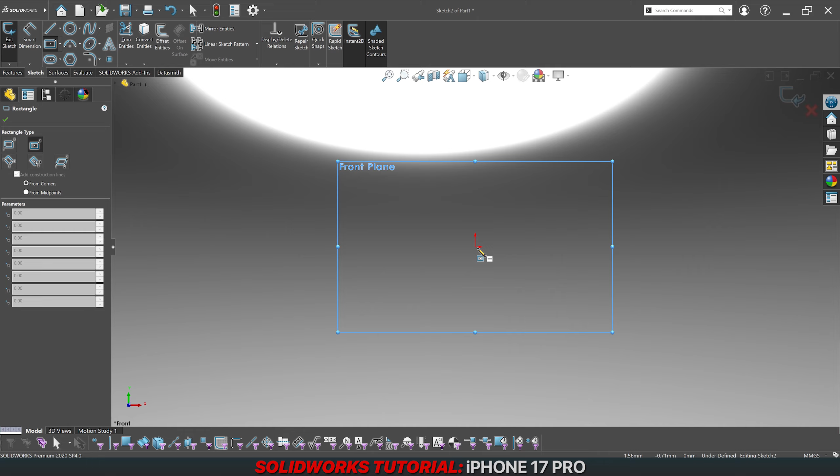So front plane sketch, it's gonna be a rectangle, of course, 150 and 71.9. If you are doing this with me, make sure that your SolidWorks is also set to millimeters. And that's the outline.

Let's save the part just quickly. '17 Pro. Front plane, let's do a front view. I'm gonna unlock aspect ratio, disable this, and make sure that height is 150 and 71.9, like this. Now let's see if this makes any sense.

On X it should be 75, minus 75. No, it's 71.9 by 2 minus, so minus 35.95. I might leave these images somewhere so you can download them for free, of course, if you need them. And minus 75. I'm gonna call it a blueprint.

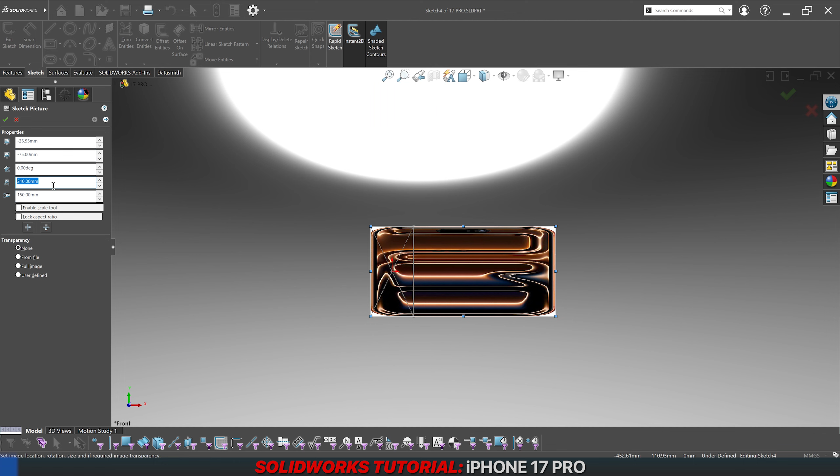So 71.9 by 2 minus, and minus 75, and make sure it's here 150 and here 71.9. It's way better, and like I said, it doesn't have to be perfect, it's more than usable. So right off the start, let's also rename this to front.

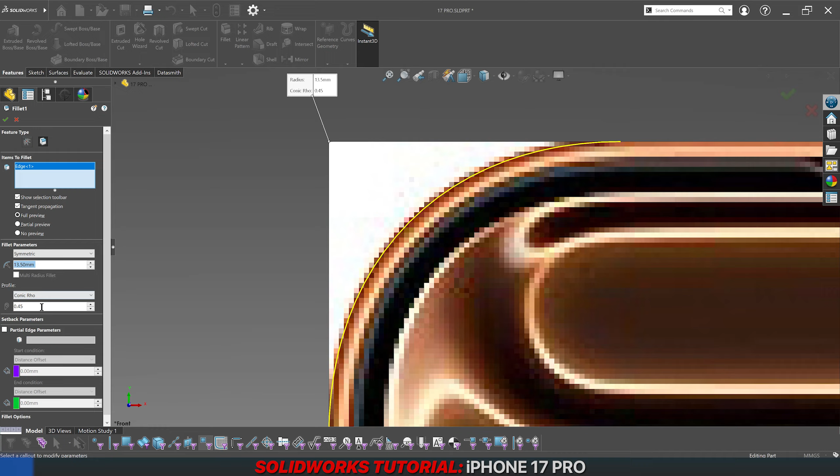13.25, 0.4, 0.45, 0.46, 0.45 actually, or maybe 13.5 and then 0.46. Let's see if this gives us better tangency between these. Yeah, not really. Zebras are again showing us it's not good.

Transition between these surfaces really needs to be good, because like I said, later you can see here how good transitions are looking like. This one is not. So this first portion is taking time, but you know, you gotta do things right.

So what I typically do is something like this: center line from this point here and something like this, and we will make a line between that sits at 45 degrees, because when it's 45 degrees and we give it a dimension here like 13.5, we also have it on this side and we don't have to add it.

As you can see, it's gonna be 13.5, and if we later need to change this dimension, go to 13, this one on the left is going to update as well. Now what are we drawing between these two? It's gonna be, of course, a style spline,

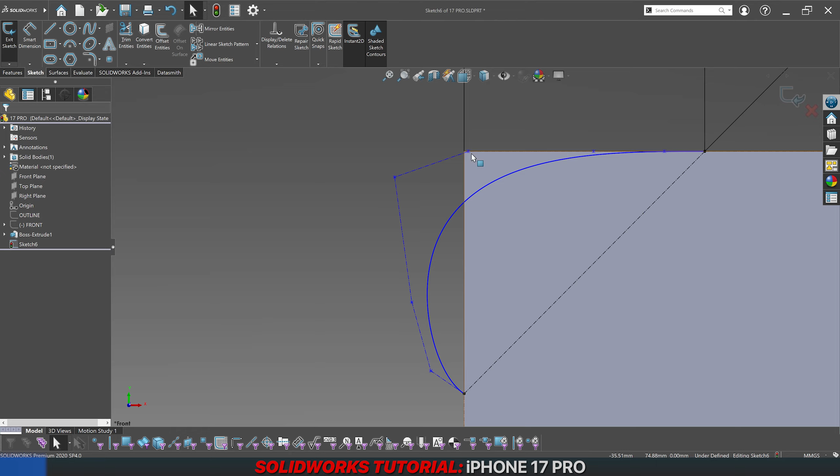And now let's make these horizontal. Horizontal. These should be a lot shorter, so let's drag these points something like this. Vertical, vertical, and vertical. This one, of course, is going to stay angled. It's also gonna be 45 degrees, but we don't have to add this angle. It's of course gonna be this length.

Now, what we are doing from this point on in this particular sketch, two important things. First one is to right click here and enable show curvature combs. And for my screen, I think this is fine. So first idea is that we have to make this transition, which is visible on curvature combs, as smooth as possible.

The second thing is, of course, and that's maybe the first thing actually, is to match this edge to the edge of this front image blueprint. So what I see right now is that perhaps we should make this even longer, 13.5, something like that. We will see about that later.

So this first line till this point, let's add any dimension for a start, like 2.5. Now the second one, let's add 2.75, and third one, let's add 3. Now as you can see, we are pretty close, but to me this transition is not good, and also you can tell by the zebras it's kind of deflecting in both ways.

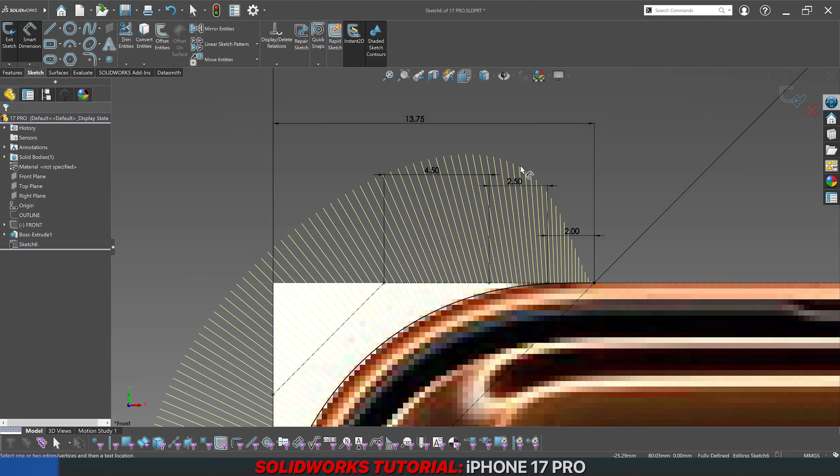Sometimes it's also faster to just delete dimensions and drag these points. Yeah, it feels like this first one needs to be very short. This one in the middle is really not helping me a lot.

Yeah, making the first one longer is definitely not the way. Making it shorter sounds good. Let's see about these now. If we make it how much it needs to be. So something like 1.5 actually. And then the middle, for example 3, and then the last one 4.5. This looks decent.

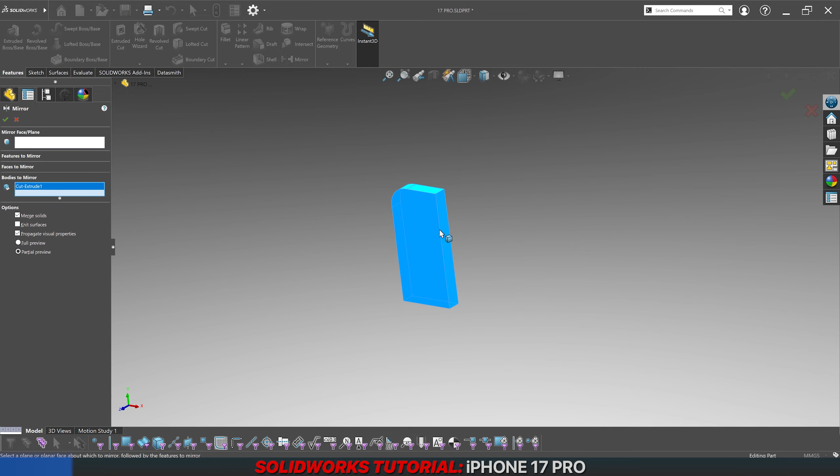The only thing that I have to double check now is when we go and mirror this, make sure to merge solids. When we mirror this around right plane, and I am of course mirroring it as a body, and top plane, make sure merge solids is enabled so it all becomes one body.

Now this needs to be inverted because when the phone flips, so flip vertically, or we should actually, let's actually, I'm sorry about this, let's make a sketch, and first let's make a plane. Front plane, this plane is gonna be at 0 and flip normal. Okay, hide, make a sketch. This way we are looking at it from the back like it is in the

picture. Let's see if I did this one well in terms of cutting. It's not a perfect cut in Photoshop, but I think it's gonna be useful. Yeah, I should have cut a little bit more in this area, and in this one it's good. It's gonna be fine, I guess. Disable this one, disable this one. Again we have 150, 71.9, and same here, 71.9 by 2 minus 75.

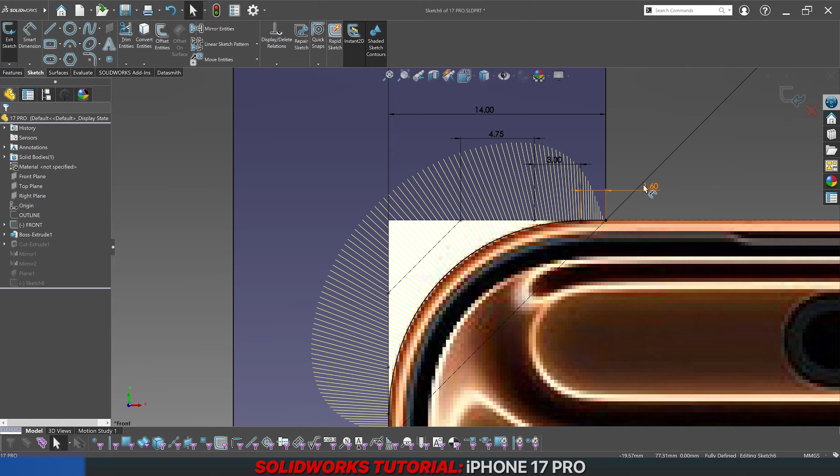Let's actually try and go to our cut. Enable this sketch and make this one 14. Make it 1.6. And let's see if we want to extend this last one. Yeah. 4.75, 3 and 1.6. This is gonna give us a little bit better transition in this area, and it's gonna be more smooth. As you can see, the curvature on this curve to me looks perfect. And now the curvature combs. So 14, 4.75, 3 and 1.6.

That looks perfect. Let's name this back. Let's look at it from the back. Looks way better now, but as you can see, it's already hitting the antenna lines, which is kind of weird that we have gone so deep. But yeah, it also does actually make sense that the antenna line is beginning right at the end of this curvature. So yeah, let's leave it as it is.

One thing that we can also do right now, just to make sure, we go to this sketch. And let's see if we offset, for example, this one. Offset by something. By 5, 4, 3.75, 3.5, 3.7, yeah, 3.5. It's not gonna be the same, but to me this is still indicating that we did actually do a good job. 3.54, 4.5. Yeah, this one is definitely gonna be a little bit smaller in terms of that fillet size.

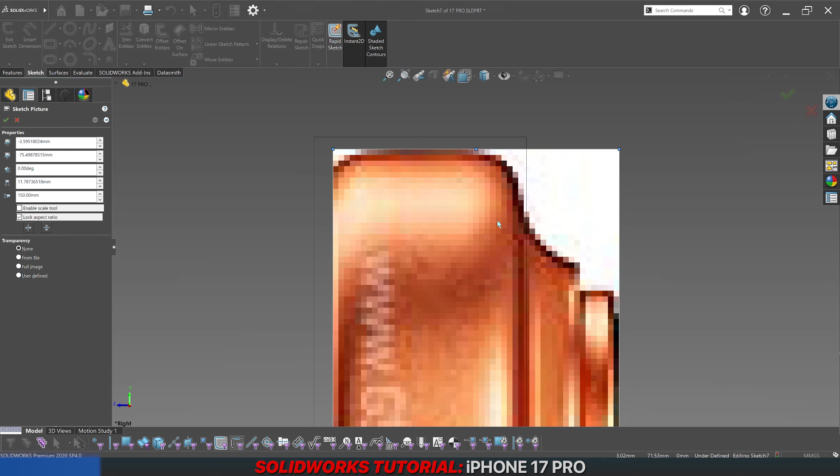150. Yeah. Sorry. Let's try again. Delete. Let's try again. This is how it actually looks in real life when you are not prepared. 150. Let's see if we drag over this, how it's going to look. I feel like it's not going to match perfectly, and as you can see, it doesn't. Especially down here. Let's try making this bigger.

As you can see, as I drag it down, this bottom edge is following our edge, but the left and right are not really matching up. So let's see if I disable lock aspect ratio and we do something like this and something like this. Maybe just slightly higher like that. And let's see the bottom. Yes, slightly even higher. Something like this. It says 150 points. Let's make a round number 35 and 13 points. I don't know, maybe 0.2.

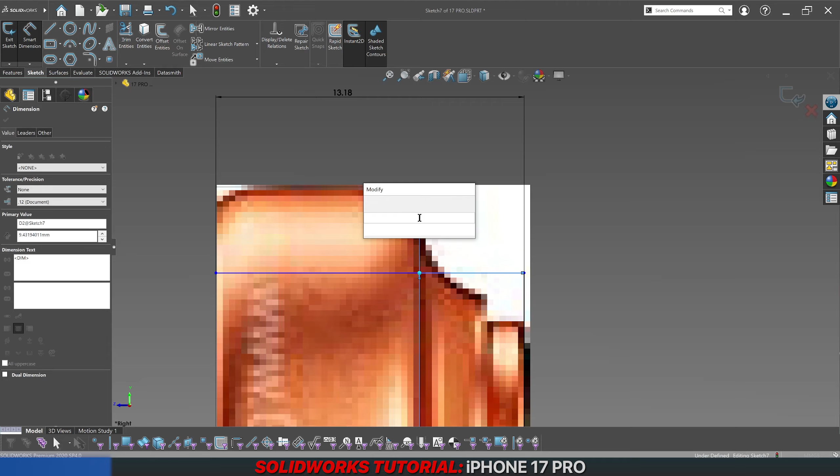Let's see now if we go about 4.4. That's actually quite a lot. I feel like I should have gone the opposite way. Why does this lock aspect ratio keep turning on? Why? What the fuck is wrong here? Yeah.

So the camera bump is somewhere around here. From this edge it should be 416, I guess. I guess that's it. 416, 418, 1318. I think this is an accurate representation. I still feel like this should go more towards the right. Yeah. Oh man, this fucking lock aspect ratio is...

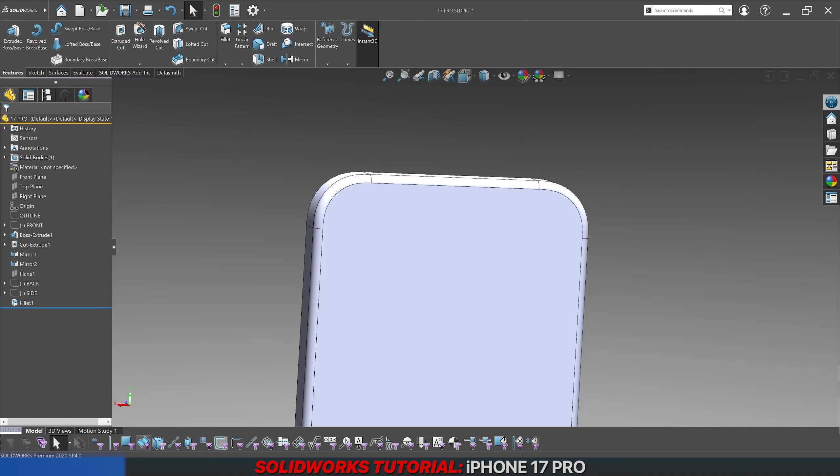The only thing that I'm wondering now is, should these fillets, especially the one on the back, be like a typical circular normal fillet, you know? Because if we look at... shut the fuck up. We look at the image, it doesn't seem to be any special kind of fillet. But if we look here on the side,

yeah, let's have both of these at 2. So the front edge should perhaps be smaller or not. 1.75 or 2.

I gotta open up my iPhone that I have in my case. Just a second. I don't have the same generation iPhone, but I'm wondering if the front fillet is smaller than the one on the back. Yeah, even if it is, I can't really see it with my eyes.

But I was also wondering if this fillet on the back should, for example, be curvature continuous, and once we turn this on, yeah, it looks too much. Let's bring it back to a normal circular fillet. Oh, it's this one. Circular, and I'm still doubting the size. Should it be 1.5 maybe? Like smaller or bigger?

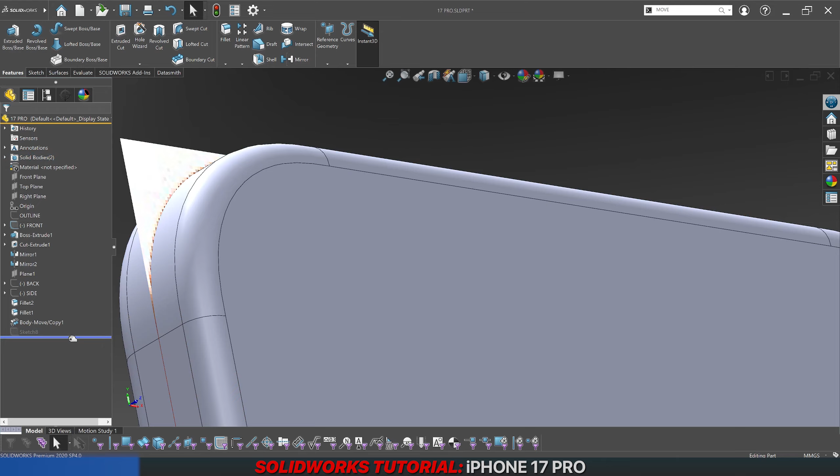Now we will need this body, so let's go back on that one, move copy command for the bodies, click on the body, copy one, click OK. Now as you can see we have 2 solid bodies, and I'm gonna hide this second piece. I'm gonna take our sketch and cut by, for example, 2.5 or even 2. I think it's enough, or let's go 3. Something like this to the inside.

Let's hide this body now. Let's unhide this one. Use the same sketch, extruded cut, 3 millimeters, flip side to cut, and select this one. Okay, now we will take this face plane, make a plane by 0, and use that plane to make a cut with surface.

In order for this cut with surface to work, you need to have here, when you go to features, this small tab, right click, you need to have the tab called surfaces. So once you go to surfaces, you have cut with surface. That's it for that. So this is gonna be the front and this is gonna be the back. Let's see what else I have to do here.

Yeah, we need that black bezel and a glass on top of it. So this is gonna be... I'm thinking how to do it with less drawing over. Let's for example make a fillet 1. That's too much. 0.25, 0.5. Yeah, let's do 0.5. It's gonna go of course all the way around. Now

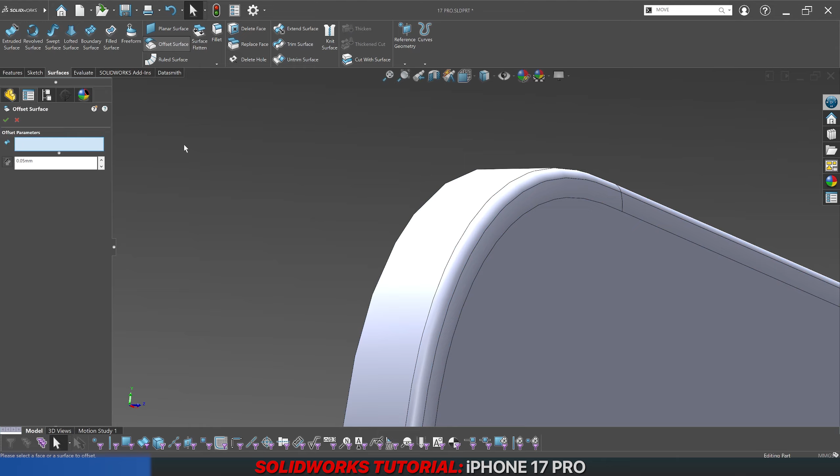and aside from this one, let's make another surface offset. We will offset again everything. This time around we don't have all of these selected. Do not select the back face. 0.1 again to the inside, click OK, and we go cut with surface. We use this second surface offset that we just made. We go to the outside and we click on the body.

Let's hide surface offset 1. It's already hidden. Okay, this body needs to be black. Because this is gonna be... no, not the surface offset. I want this body, appearance, body. I want the body to be black. What is wrong here right now? What am I missing?

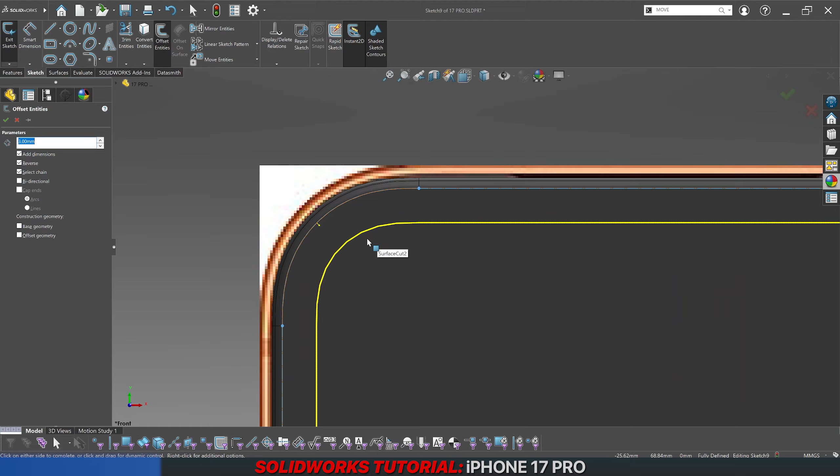Anyways, front plane sketch. We take front, show, and let's click again on this inside face, convert, select, for construction, offset by 3 to the inside, and let's make it actually 0.5. This is gonna be the screen, and as you can see it pretty much fits well all around. Exit, and let's cut it right away. Extrude cut through all, this direction.

So we have two bodies right now, the bezel and this main body. We also have surface offset 1, surface offset 2. Okay, surface offset 1 is going to be called screen glass, yeah.

That's okay, and let's just make sure, if we click on right plane and make a section, that this surface that is going to represent the glass in the 3D rendering is simply not coincident, if I can say like that, with this surface. This is quite important because if you match this glass surface with this surface and you have, for example, some dark plastic material here and glass here, and they are sharing the same exact surface, you're gonna have glitches

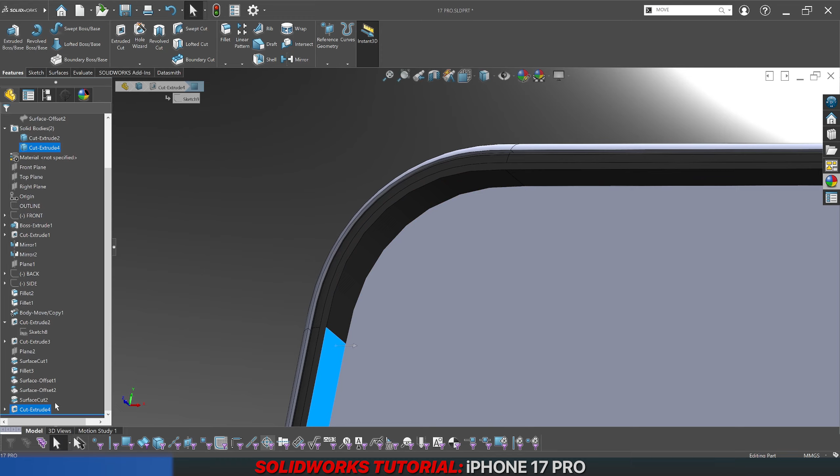How to make the screen fast? We have this sketch, so let's make, for example, extrude, and it's gonna be on this face. Let's make it 3 as well, and go to this direction, to the inside. Do not merge result. We obviously want this to be a separate body, because also in this separate body we have to make some cuts for the camera. Show this one.

Let's see if we can do it something like this. Pill shape design. This can be, for example, 3. This length should be 15 maybe. Yeah, it's kind of matching. And from the origin it can be 67.25, or yeah, 67.5. Exit, and we can make the cut.

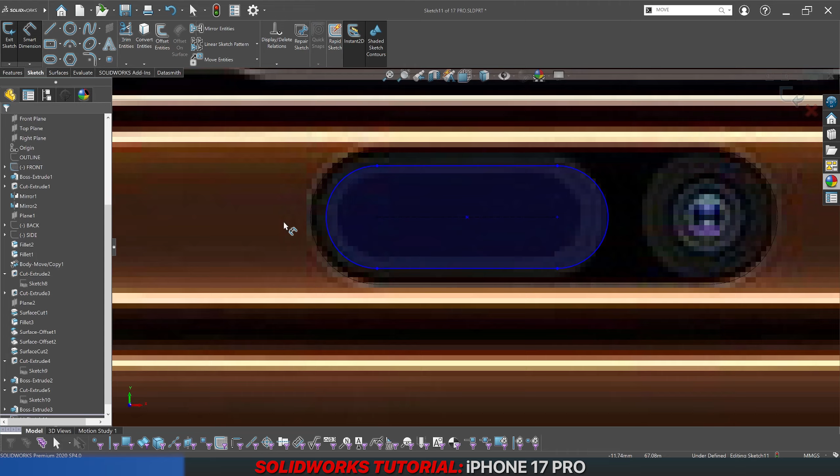I'm gonna copy and paste appearance, sketch once again. Let's make just a straight slot, like simplified sensors, something like this, a slot, and let's see the size for it. 2, 7, 725. Yeah, not 0.5, 725.

It feels like these sensors are also having some sort of, as you can see, outline. Let me look at my iPhone. Yeah, you don't really see that. We will only do something like this. We will cut by 1. And we will actually increase the size to 2.5 to 25, sorry. And use the same sketch and just make a planar surface.

That's it. This surface, we go to surface plane and we make it really dark so it's distinguished from this one. And these are the sensors. For now I'm just gonna do a hole for the camera. Of course I can't see anything well, and now I can.

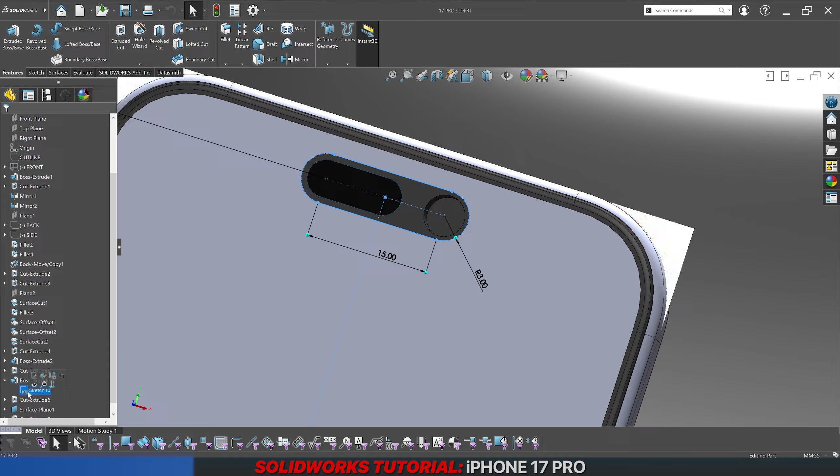So let's continue. We have to do a camera here. I just wanna check out this slot dimensions. Let's see. This is 3. Yeah, that looks believable. And also this one is 2.25, 2.5. Yeah, that looks better. Here we also have 15. Okay.

Blueprint. I also wanted to check something. I'm not sure if we did that earlier. Yeah, the curve is fine. Okay. Looking at the blueprint, we can see the camera housing has like a ring around. So let's actually use this sketch, sorry. Let's use this sketch because it's already there. Extruded boss, thin feature 1 millimeter.

Let's go up to surface. Oh no, actually let's make it 3. If it's 3, then we might need longer. Or not, let's see. Inside, yeah, that's too much. 0.5, 0.75, 0.7. Do not merge results. Let's see how deep is this cut. It's 2.5. Let's make it 3 as well. But then this slot is also 3. This has to be shorter. 2 point, I don't know, 75.

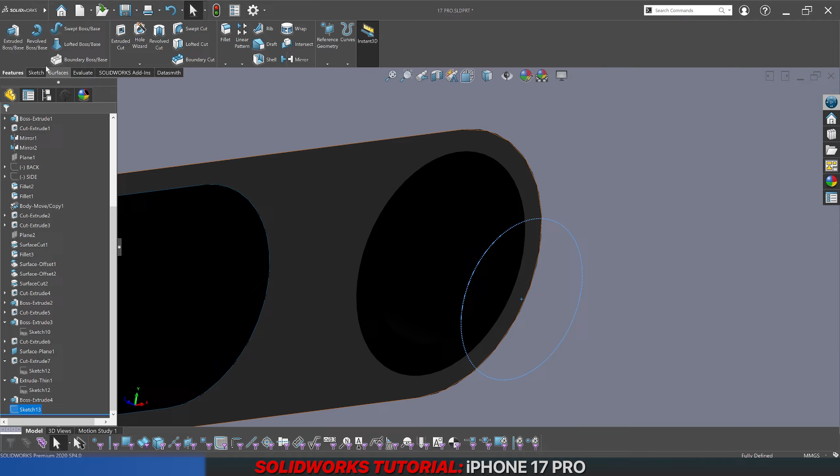Now inside here we go to this face and make a sketch, convert entities, and we will go 1.5 maybe. No, we need the housing, sorry. How much should this be? Let's go up to surface. Yeah, it actually needs to be like 2.5, I think. Yes, 2.5. It's gonna be thin feature 0.25 to the inside. Do not merge results. I also have to double check with this blueprint.

If this one is like that, then this one is something like this. Yeah, let's make this one. Let's leave it as it is. Sorry. This one actually needs to be bigger, 0.5. Yeah, that looks also believable. This one is later gonna be dark as well. For now, let's also make something similar there. Sorry about that. 1.75, or maybe less, like 1 mil. Let me see. This is the beauty of not being prepared. Merge result selected, feature scope this body.

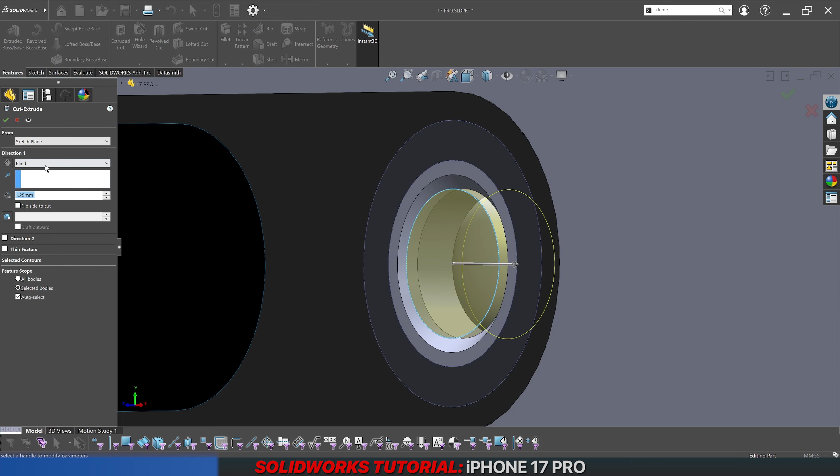That's that. And also this face, click on it, go to surfaces, offset surface 0. Confirm, make sure that surface offset is there, and then let's use which sketch this is. We need this sketch, or no? Not really. We need another sketch right here. Let's use this face, and let's go over here and click on the edge. Convert, it needs to be a circle, and then extrude cut through all, and click on this body.

This way what we have done is, if we hide surface offset, we have deleted the surface body that we have used, and as you were able to see, it was elliptical. I don't want it there. I will also have to add here on this edge a planar surface, click OK. And I'm gonna have to move it slightly to the inside so it doesn't intersect. As you can see, it's intersecting this body, this black one. So go to move, copy bodies, click on surface. To have this tab you need to press F5 on your keyboard. So filter surface bodies, click here, do not copy, and we move it like this by 0.25 for example.

This surface body is going to be like the farthest back of the camera lens. So let's go here actually, surface bodies. Let's call it lens, or lens back. And then we unhide the surface offset, show. This is gonna be lens number 1. So we go here, rename lens 1, and we will again go to move, copy bodies command. This time around again have this filter on, click on this one. And do we want copy? Yes, we want copy. Let's go like this, 0.2, click OK. And this one is gonna be lens 2.

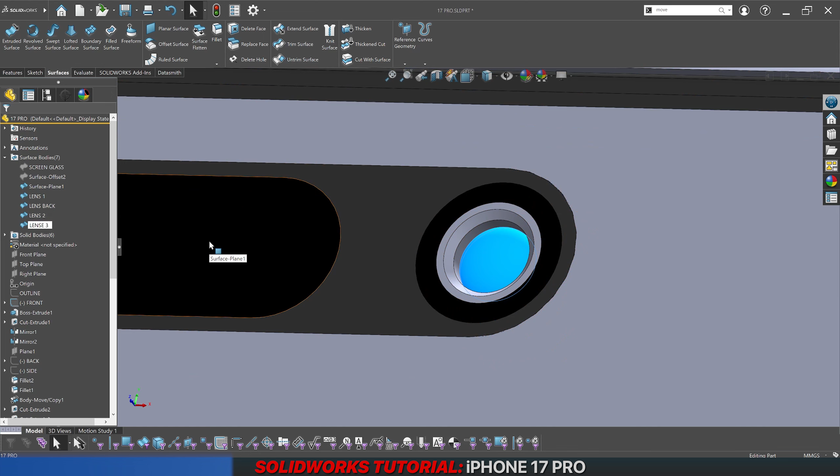Is it spelled lens with an E or lens without an E? That's the biggest question for this video, I guess.

That's the camera done. So we have this first housing, we have this imitation of the sensors, the face recognition sensors. We have the camera. This housing is also going to copy this appearance to this one. In the rendering, these two are not going to be the same, because this needs to be rough plastic or something like that, rough metal.

For the lens, I'm going to hide this one and this one and go to this first one. As you can see, lens number 1 is only visible, so we go to this body. I'm just going to make it blue because later in rendering I want to have it separated from the rest of the body, from the rest of the parts in the model.

Copy appearance and lens number 2, I'm going to paste it here, paste to the body, and lens 3, paste to this body. That's pretty much it with the camera. Let's also unhide screen glass, show. Yeah, that's pretty much the front of the iPhone finished, I guess.

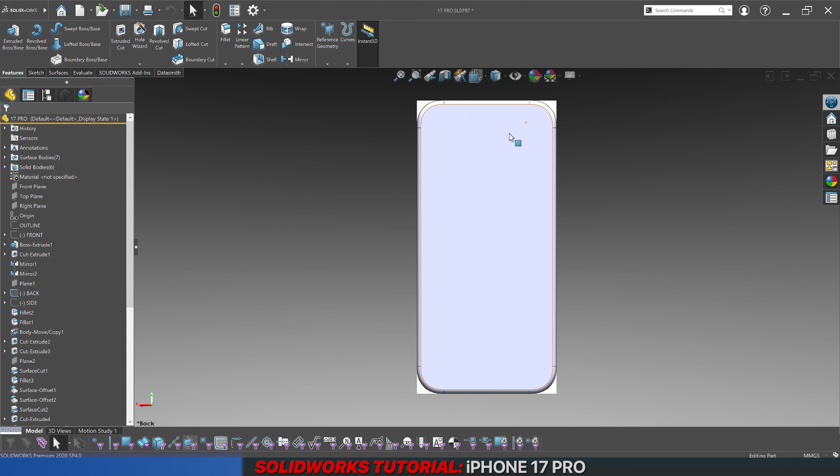We can start the rear, and where is this sketch? It's called back. I'm going to make it visible. Let's create, of course, this slot for the camera. Approximately. We'll see about the height. Height should be somewhere around 35. Let's make a center point vertical with origin.

And the width is, let's see, 63.35. Let's also see if we were going to offset it from here to 66 and from here to 45. Let's see if we can make these two edges equal. Make equal for construction.

This means that vertically from origin till the center point we have something like 53.05. Yeah, I think that's that. Keep in mind that this at first is going to be just a normal solid body separated from the other body. It's going to be like 5, direction 2, 3, do not merge results.

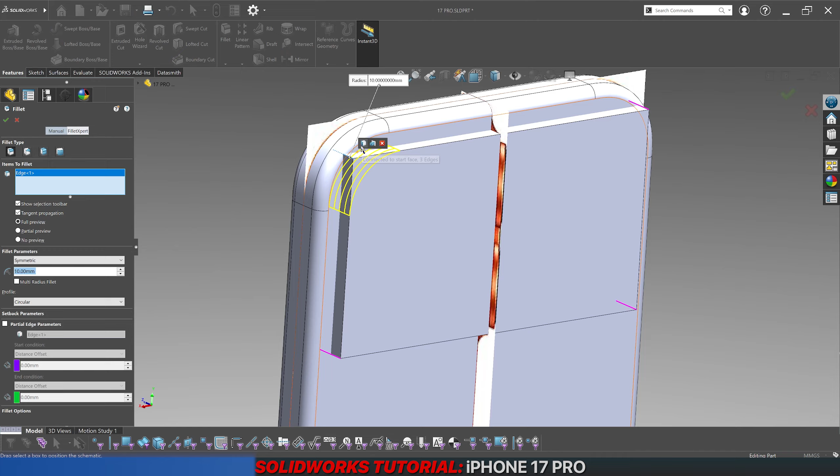Now visually from the back again, let's see if we can make a simple fillet here. Let's see which dimension it's going to be. I think it has to be curvature or something. Yeah, curvature is too much. Conic rho. Conic rho seems decent, I don't know. 10 or 9. 9.5. 10. 10, 0, 4.

Let's also see if we can do conic radius 11, 9, 8, 8. So it's conic radius 10 to 8. Let's see about the transition right now. It's not great, but this part of the iPhone is rough metal in the end, so it's not really going to be visible a lot.

So let's go next. Now, how I usually do this area, let's first also do a combine feature, these two. I usually do either a chamfer that is like 2.7, and for example 30 degrees in this direction, and then I do a fillet, 2.7, 3, 4, 5, 6, 7.

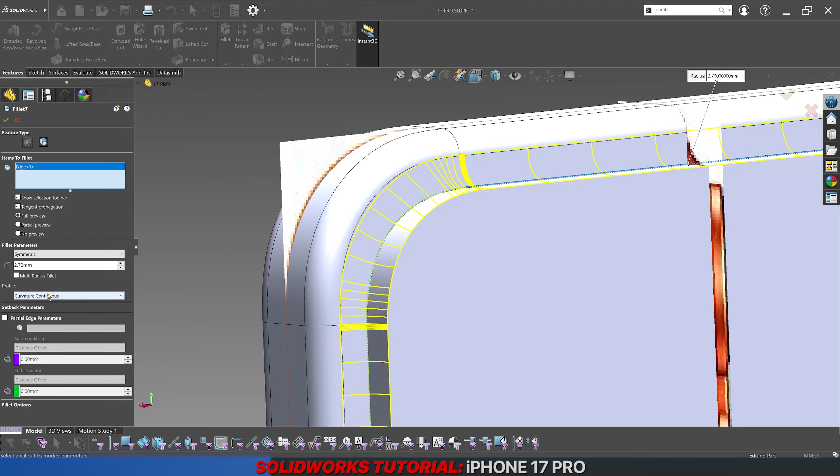I feel like there is absolutely no difference. The curvature continuous is actually kind of heavier. Let's just go with a simple fillet, and that should be completely fine.

The only thing that I'm wondering right now is if this should be so big in size. 2.5 to 2.5. If we make like a smallest of fillets, 0.25 here, let's see. Yeah, if it's looking too much, like maybe 0.1 only. Reason I'm doing this is because I'm trying to make this fillet as small as possible.

Let's try deleting this one, let's try deleting that one, and let's try doing an asymmetric one. 2.5, 2.7. Which one is the bigger? So 2.7 here and 2.5, 2.5, 2.4. Let's try doing 2.35 and 2.7. And then I pressed X. So 2.35 and 2.7.

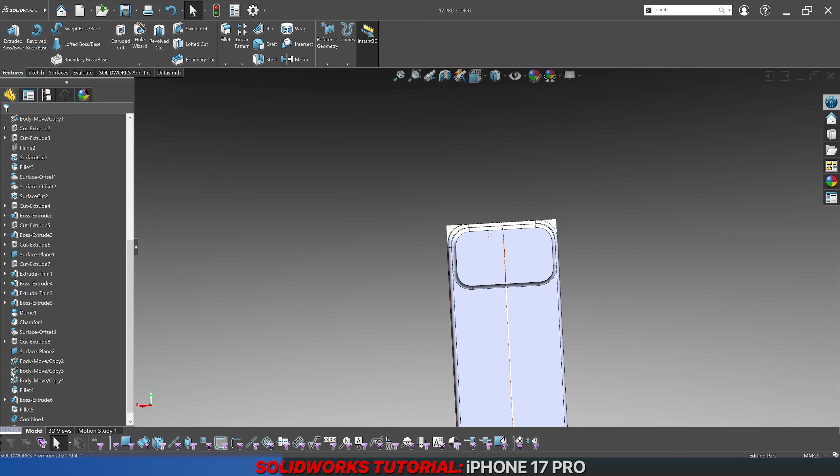This is the deal, is that I want to avoid these fillets overlapping each other. Perhaps the other way to avoid them overlapping is that maybe this fillet in the end could have been smaller, but I don't know. It all looks so close and so similar. When it comes to shape, I don't think it's too big of a deal. Let's see what else. This other fillet that we have, that was 0.1 around this edge, we will add it later once the whole thing is finished.

Let's also check curvature. Yeah, this was one of the reasons why I didn't have to do curvature or take care of these. If you remember before fillet, you see the curvature between these two is not so well as zebras, but as you can see they kind of disappear and become one because we have to add fillet. So it doesn't make a lot of sense to be struggling to make a perfect transition, because as you can see you already have almost a perfect one.

Let's go here, and for this end I'm just gonna add these circles, or actually let's dive deep and do this part. Now what's important here, I guess, is that a distance here has to be similar. It's 1.5 and 1.5. And vertically, let's make sure these two are vertical. Let's go down. And let's go from origin actually. 30. If we go here between these two, 3.2.

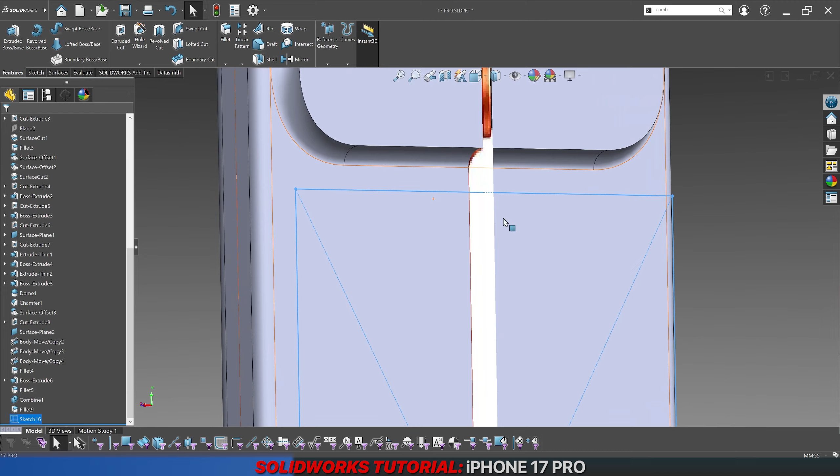Close the sketch, and it's gonna be a pretty similar process. Actually, let's right click, edit sketch plane. We have to do this face. We will create extrude boss. Let's do, I don't know, 20. Do not merge results. Fillet. Let's see if we can use the same fillet that we used. How much was it actually? It was conic radius 10 by 8. So it's symmetric.

Conic 10 by 8. Let's see if this is the one. Yeah, it's quite the same fillet. It's not looking perfect here, but nobody's gonna notice that. Now instead of going this way, it should be going the opposite way. So 1 to this side, or even smaller. I don't know how thick the glass on this iPhone can be in this area.

Let's sketch and not offset, sorry. Click on the face, convert, exit, and let's unhide. What was that body? Fillet, this one. We'll take this sketch, make extrude cut by 1.05.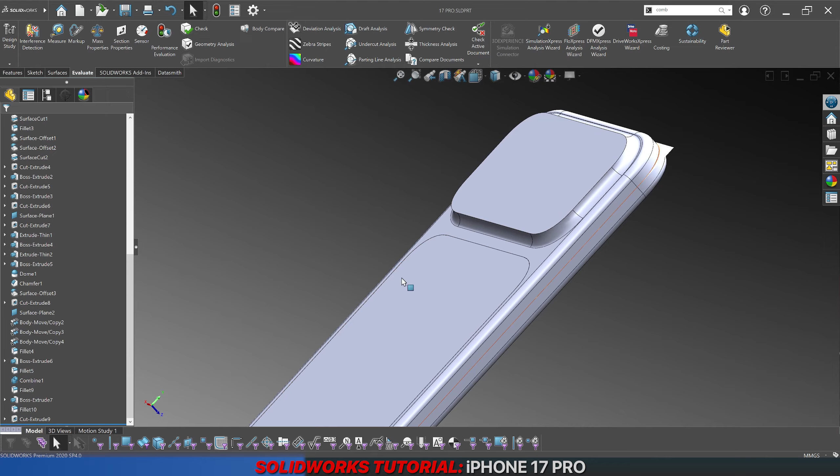So this is also what we need to avoid here, because as you can see, faces are actually intersecting right there. To avoid this intersection, we will add, using this sketch, another cut. It's going to be thin feature, this time 0.05. Mid plane, it can go again 1.05, and actually let's select the glass body. Click OK, and let's use section again on the right plane to see if we have this distance between. Yes, we do. This time it's smaller because we used the mid-plane option, so it's 0.025 in between, but that's quite enough in terms of rendering.

Uncheck this. I'm gonna quickly open up KeyShot just to show you what I mean by these intersections and issues and glitches. So KeyShot, we put our model in, GPU, just a second. Material, unlink material, unlink material. This can be glass and metal. Let's see, for example, any kind of metal, polished. Now this looks kind of deep, so we'll have to see how deep this is gonna have to go. Let's see about the rough one.

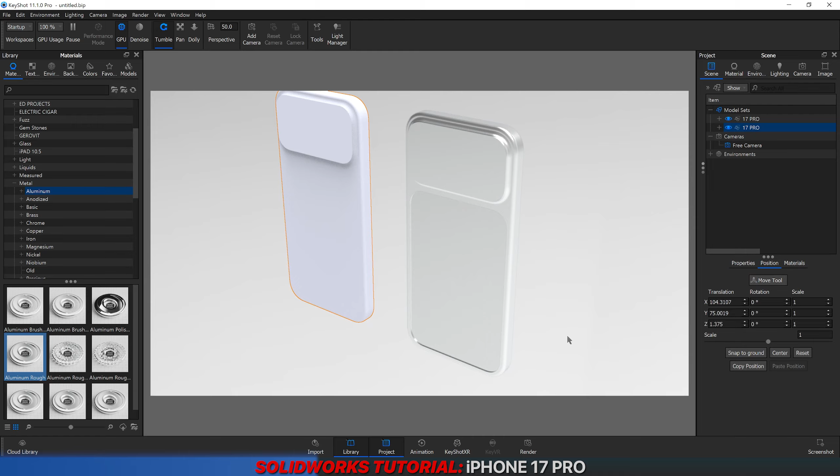So this is the new one. We're gonna move it like this. We're gonna shift left click, control shift right click, shift left click, control shift right click. Now if we zoom in here, you can see the glitches. You can see the glitches.

Let me show you, yeah, refractive. If you even uncheck the refractive, you're gonna see glitches everywhere, as you can see, a lot of glitches. It's simply because you are sharing the same plane for two surfaces, and it's not something that you can do in 3D rendering. When it comes to this part, whatever you do to this material, you are never going to see glitches. You can see, for example, dark area, but you are never gonna see any kind of dashed lines or anything.

Let's continue the work, and as we have gone from the front to the back, let's do antenna lines, and for a start I think you can use the front plane sketch. I'm gonna go back and see if I can see well. Yeah, we can see very well the antenna lines. Now, it's kinda complicated because this edge is not following exactly this one, and I really think right now that it should actually follow it. So let's see how to fix this.

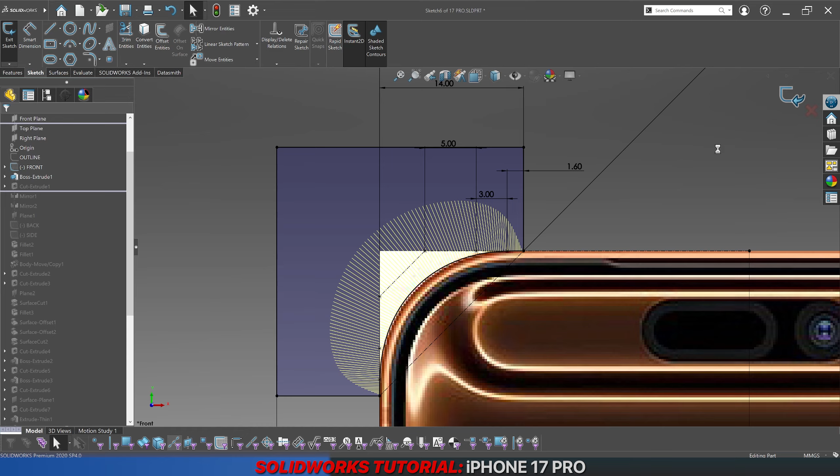This is now the moment where you can see how SolidWorks is super powerful software, and if you set the model correctly, you can just drag this blue thing down and you are good to go. There are zero issues. So maybe I haven't prepared a tutorial for you, but I have planned very well all of these steps without too much complication, so that we can easily change and adjust things.

Let's see if we can match these two edges to sit and be coincident on each other.

I'm sorry, I'm also gonna have to drink coffee as I record this video.

We have this boss. Let's see from this extrude how much we have between these two. There is going to be 955. Is it a round number? Yes, luckily it is, and I guess it's quite the same here. Yeah, 955. So this fillet should be, I guess, 955, and as you can see it's 10 by 8, so we should be able to have it done well.

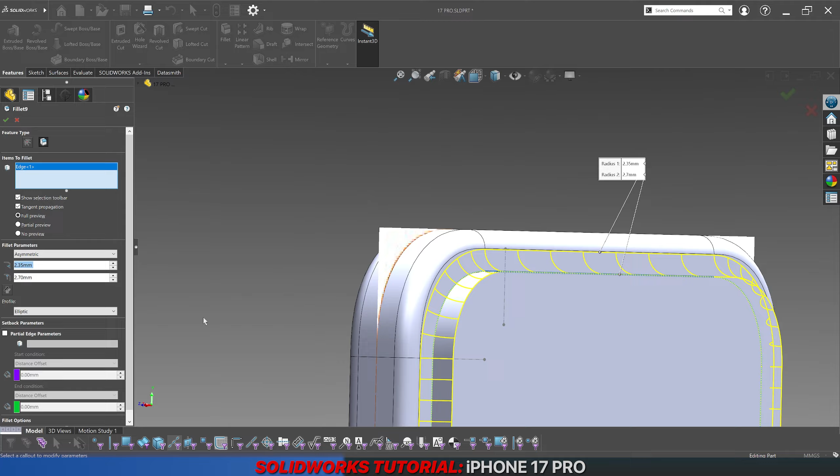So we had an asymmetric 2.35 to 2.7 fillet. Sorry for my accent. 2.8, no, 2.7. It's this one here, 2.4, 245.

2.5. Yeah, it's kind of deleting the edge. 2.45. Let's see if we do 2.45 and leave this one at 2.7. It looks good. I believe that in a way it makes more sense to have it done like this, where there is no small face in between. It's not like a huge mistake if you do it otherwise.

Also, judging by the image here, you can't really tell. Like I said, I don't know if these two should connect or there should be a face in between. To me, this looks good. Let's go further. And let's hide this sketch. It was just a sketch that helped us with those dimensions.

And let's do antennas, front plane sketch. Couple of minutes into the video and we are just where we started off. Let's take this face. I'm gonna convert, select, make it for construction, offset by 0.25, and then make another offset by, let's see how much. Make sure it's select chain. It's not working for some reason. Yeah, there always has to be something with these things in SolidWorks.

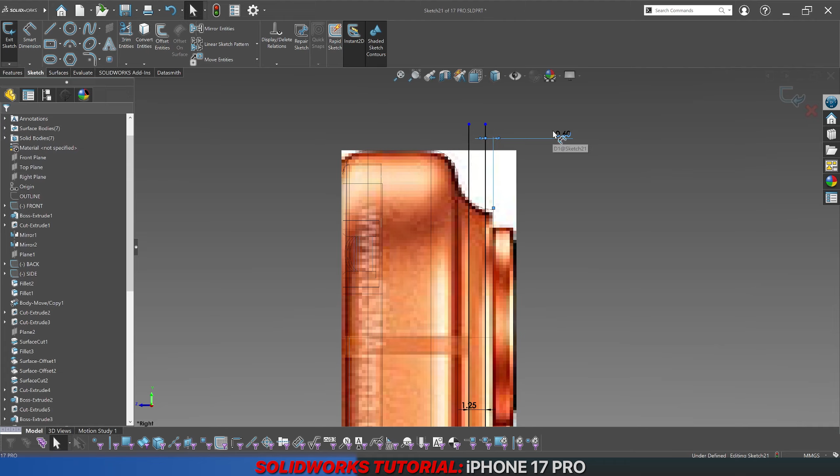Let's also make a center line from the midpoint of this line like that. Make sure that it goes from origin to the center line, 55. We can have here anything, like 55 as well, for example.

Like I said, I'm sorry, but I had to finish off my coffee.

Exit the sketch. Before we go to split line, let's also make sure that we do move copy bodies, we want to make a copy of this just so we have a good decent copy. Click OK, yes, and I'm gonna hide this copy and use the sketch. Go to curve, split line, split only these lines from the fillet, and that's it. This already looks kind of good.

Let's add the main body lines. I believe these should kind of intersect here, so let's go like this. And if it was 0.125, then it should also be here 0.125. Reverse, yes, okay. That's at least the same. Let's add any dimension like 15. Make sure that you have gone from this point. And the same thing here. This time around it might be even easier, as we go from this point, something like that.

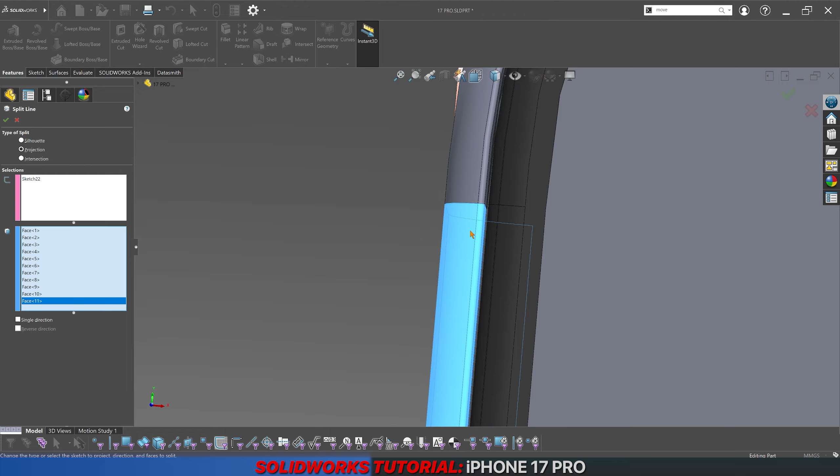The only thing that I am going to double check, maybe I can do it right now. Yeah, we don't really see how this antenna is finishing inside. This is something I'm gonna have to check before I continue the work. We can do it some other time. So I will double check on that, and let's see here. Yeah, it's all the same faces. No, I actually forgot to add this face and the same thing here.

Now these are connected, and we can go and do offset surface by 0, of course, because we only need a copy of these faces. So around the camera bump and into this one. That's all good. Confirm by clicking enter. And the same thing here, offset by 0.

Now let's remember, this fillet was 0.1, I think. We don't really see that right now. Let's see now how much it was. It was 0.1, meaning that our thicken cut can't be bigger than 0.1. Surface offset here, surface offset there, and third should be here.

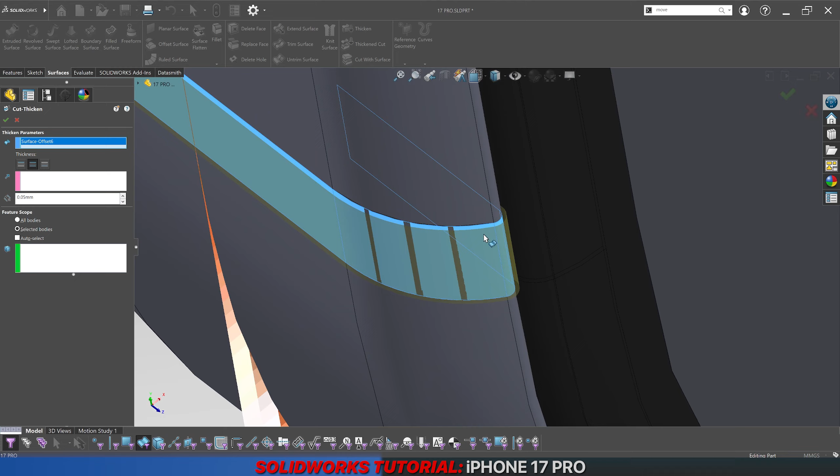Now, first things first, thicken cut. So we said that it cannot be bigger than 0.1, so 0.05. Maybe it should be enough. Here, no, sorry, delete thicken parameters. Let's make sure that you have this. Press F5 and filter surface bodies. You filter this one, and you go with this. Thicken both sides. Cut this body out. That's all good. Same thing on this side.

Thicken cut. 0.05 middle option. Select body, select this one, and same thing here. That all looks good, and just for a second I'm gonna hide all of these sketches. Also, if you remember correctly, we had another solid body as a copy of this one. So let's hide this last body and show the previous one that was a copy.

Before we go further, I'm gonna drink my coffee.

We also have to go back right now because I forgot one thing. So you just go here where you see this blue line. You drag it up till the first surface offset. You click on first surface offset. You go to offset surface and it's gonna make it on 0. It's gonna make a copy of that one. Click OK. Same thing with this surface offset for the bottom antenna line, and same thing for the third antenna line.

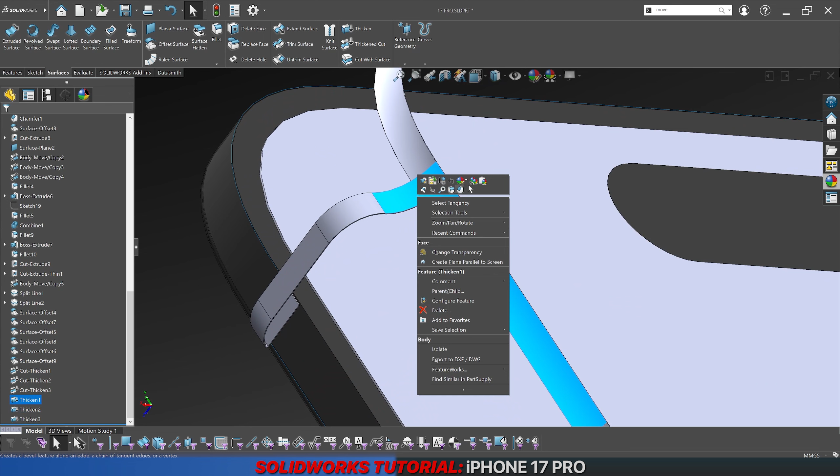As you can see, I have made some appearance by going to edit appearance, and I clicked on the body, and I'm gonna copy appearance and paste it to the body as well, just so we can have a better look at what we have done so far. And let's also unhide the thicken cut. So that's how this body is looking.

The only thing that is coming to my mind is, as this body is a glass body, should this antenna line go even further, like on this face as well? But like I said, I will double check on this with some images online, and I will let you know. For this portion of the video we did these antenna lines very good. Let's double check here. The dimension is probably the same for both, but to me these visually look different from what we've done. I'm not sure if this is something related to 3D rendering.

If we turn on the perspective, let's roll the view. It might be only the effect of 3D rendering. We will also have to deal with this some other time. This fillet to me is now really a question mark on how exactly it should go. I don't think we did something wrong, but we might need to come back later and double check on that. Let's turn off perspective.

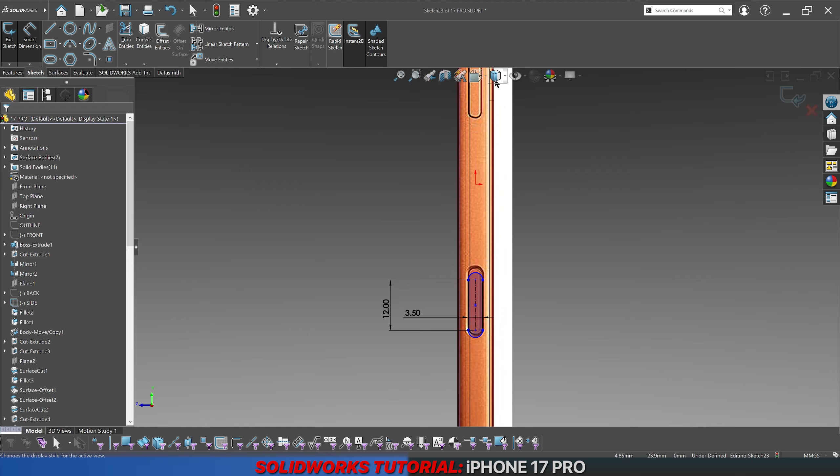Dimension roughly is 3.5 maybe. Yeah. Length 13 or even less, 12. Let's see, it needs to be, I guess, in the middle. For construction we're gonna go something like this. Or actually, let me check. Yeah, it's not a smart idea to attach it there, because the antenna line is not an object that is always there, because of the rebuild and stuff.

Anyways, I'm gonna go from the origin vertically, of course, and from origin it's gonna be 22, 21.5, 21.75, 12 and a half, 12.25. Yeah, that's it. 12.25. Let me just look at my phone. It's having a similar cut. Okay. So let's do like 2 to the inside, extruded cut.

We will of course do a chamfer of, let's see how much, 0.25, 45. I feel like the angle on this should be different. Let's see if we can do 0.5 and then here in the angle like 30. Let's see from this view. Yeah, that looks accurate, I would say. Let's go back. Actually, this cut can be quite a lot smaller. Let me measure from here to here. It's like 1.1. Perfect. We can do only one. Or even less. Let's try 0.5. That's better.

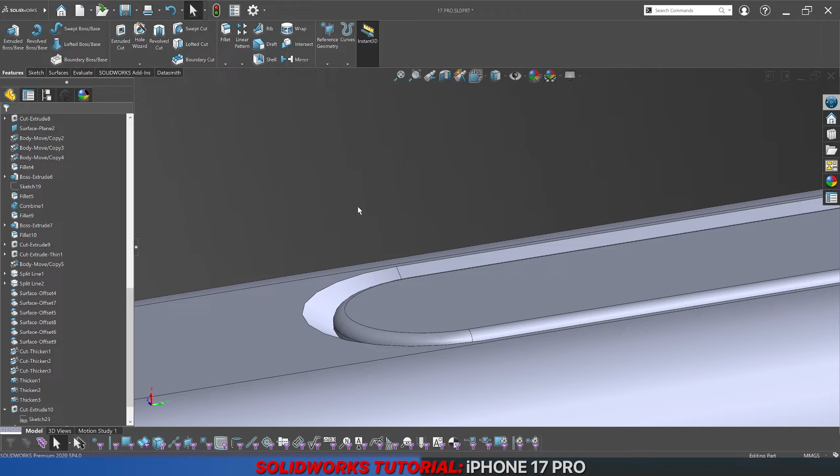I feel like this looks realistic, and I'm also going to copy, right click, copy appearance, paste, because I just want to have it visually separated. I would say this is pretty accurate. Maybe this chamfer is too big, maybe not. I think it's fine. Let's move on to the button again, sketch.

This time around, does it sit also in the middle? I think yes. So center line from the origin like this, and I want to actually use a center point straight slot, and it's going to be, let's see how much, let's say 3. How much did we have here?

It was, convert. Let's convert to see how much was it here. It was 3.5. I don't think we need that much this time around. This one is smaller definitely. Let's do just 3, and the length, how much could it be? 12 and a half.

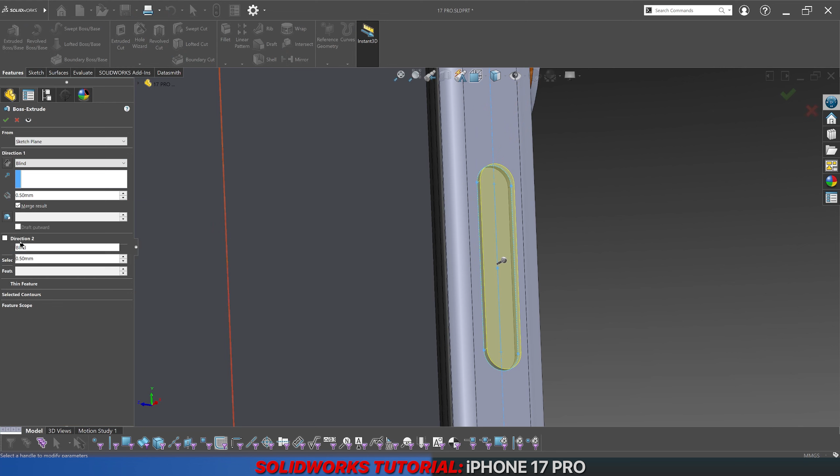let's do the cut. Again, it doesn't have to go very deep inside. And alright, I did 0.5, and let's also do the button like 0.5, and also direction 2 0.5. Do not merge results. We want this one also to be a separate body. And for the fillet, let me also check my phone. I really can't tell. Is it something like 0.25? I'm gonna do 0.1 on this body.

That's the button finished. Did we have already the other side of the device? Let's hide this side sketch, and let's see if this one is. I don't think it's that one. Yeah, it's some other sketch. So the good news is that I found the other side sketch for the other side. So right plane sketch. Let's actually switch view like this. Go to the right or left, however.

Sketch tool, sketch picture. I will attach also this one. This one is silver though, but it's a good sketch. Flip vertically. No, flip horizontally, sorry. Horizontally, enable scale tool, disable. Full image. No, from file. User defined. I just wanna get rid of the white background. Okay. That should work. And what the hell, man. Let's scale it down.

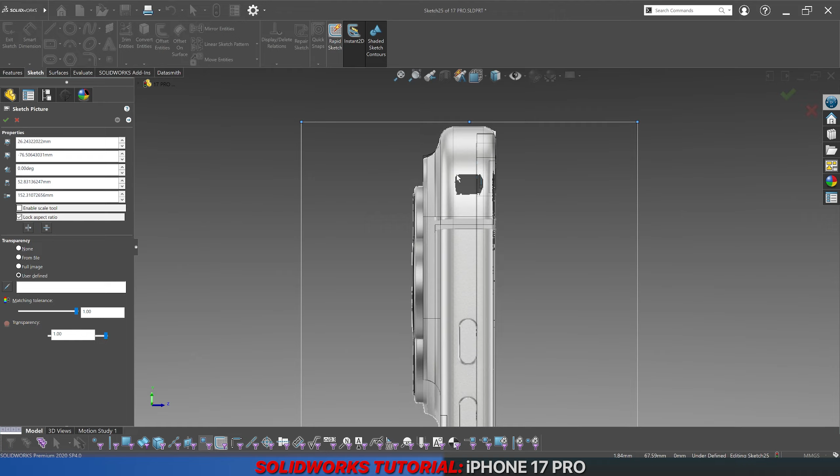Yeah, let's not care too much about that. We just need to know about the buttons. Yeah, it looks off, but who cares? We are going to call this side 2.

So on this right plane sketch, I'm gonna switch like this. On this side we have volume buttons. I forgot they switched this button. It's still like a ringer switch or however it's called. I don't know, but it's different. And we have a SIM card tray. Let's do that one first. Center point slot. Make sure it's vertical. It should, I guess, be aligned vertically to the origin.

Yeah, and it should be maybe 2.5, length 14, from the center point to the origin 40. That's too much. 39.5. Let's do 40 because with this image we don't have to follow it blindly, because it's not a perfect image. 13 and a half.

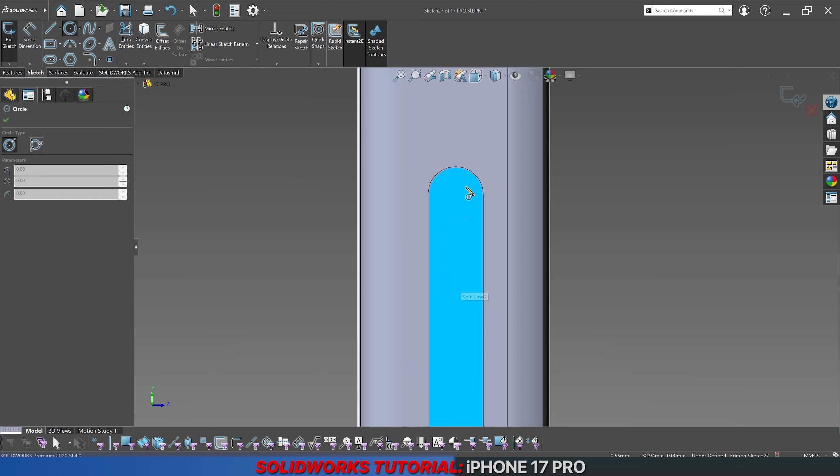Let's do just a circle. Come on, man. The snapping here. Okay. Let's double check the size. That's the size. It's like 1. And extrude cut. I'm gonna do probably similar, like 0.75. And a chamfer of 0.25.

Now, I'm going to select this face and offset like 0.1 and right click, appearance, body. I'm gonna make it fully black, and I'm going to do something similar for this small face inside.

Offset surface 0.1 and copy appearance, paste, just in case later in the rendering engine you really need that inside to be fully dark. So that's the reason for this. Surfaces fillet 0.1.

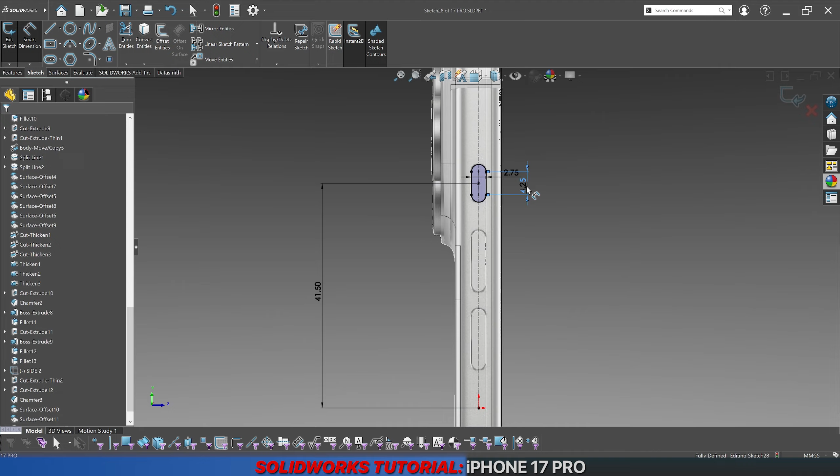Center point slot. The width 2.75. Length 4.5. And from center point to the origin 41.5. Maybe this can be 4.25. Yeah, 4.25 to 75, 41.5. That should be it. And similar scenario here.

Nine, 8.75, center point to origin 27. The reason I'm not fully following the sketch is because I believe the sketch we're using is not fully accurate either. Let's do 2.5 to 75. We did 2.75 on this one, so let's do the same. Another here.

We are going to make this line and this line equal, so they are equal in length, this one and this one as well. And the only thing left is to go from here to here, 12.7. Exit. And the same process again, 0.75, cut like that. And another straight boss, 0.75, also to the inside.

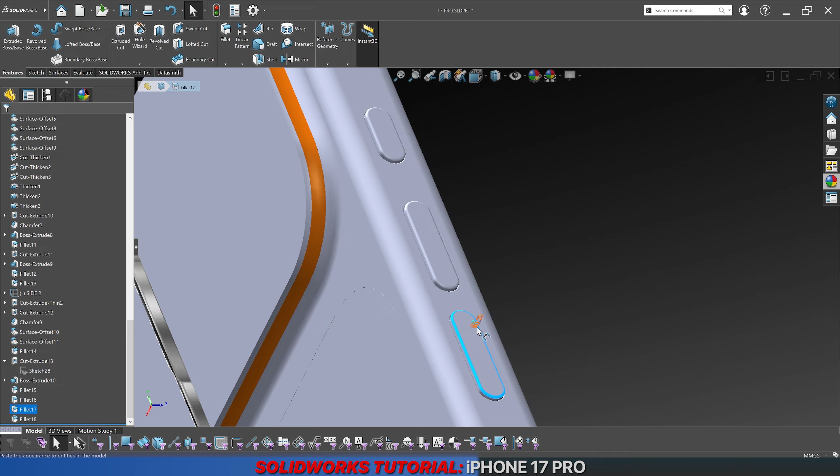And just maybe, actually, yeah, I was wrong. These three fillets are going to be 0.25. It's not actually too much now that I'm looking at buttons from further away. Also, I'm thinking if these should be any bigger. How much did we do here? We did 0.5. I'm always forgetting about these things. Let's do 0.5. You can maybe find on the internet how big they are. Let's actually check Google. I'm gonna pause the video.

So in the end we are going to keep it at 0.5. It's not a big deal. And I guess that's it for this left side of the device. And off we go. At this point we are gonna be working on the camera bump, camera and all other details. Let me just double check something. We should have the back, yeah, sure. Let's see how to start this section. Let's actually do cutouts here. So that's gonna be first.

I'm gonna draw a center line, something like this, and put one circle here, one here, and do not go to the midpoint. Just put the third circle somewhere around there, just in case this cut is not in the middle of the line. So let's see, dimensions for this should be 6 or more. And here this one should be smaller. Yeah, let's do 6 here, and then for this one 6.5.

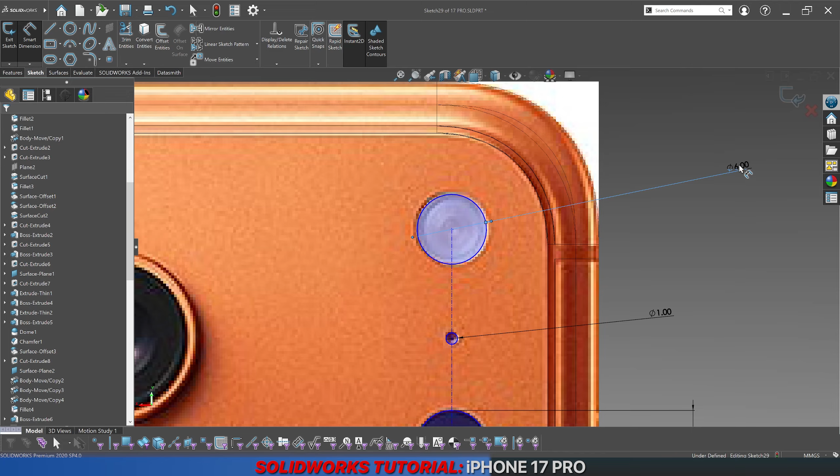And let me just go here and see if we can get a center line, just to see where the middle of this edge is. Yeah, it turns out that this hole should probably be somewhere in the middle. So let's do point of the circle and this line, midpoint. We will also have from this line to here 9.3, and same here. I believe that's it. Like I said, I'm not entirely sure if these two should be the same. Let's see if we do 6.5 also for this one. That's kinda too much. Let's go to 6. Yeah, 6 and 6.5.

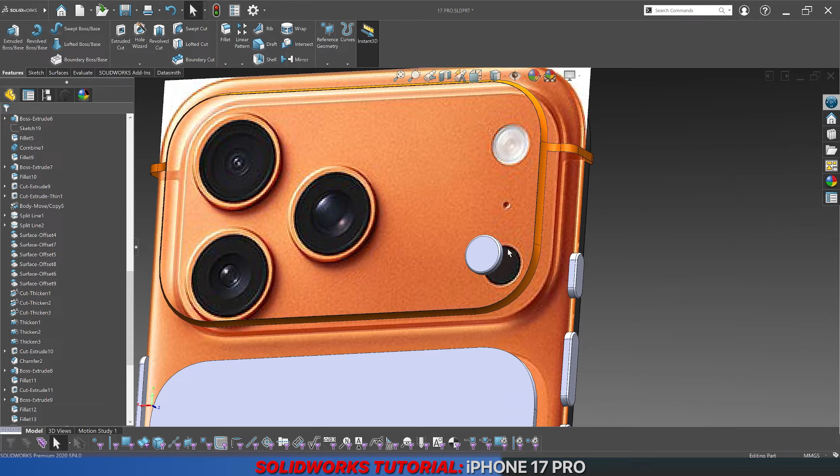And just for a second, let's hide this main body to do a fillet of, I don't know, 0.25 here. And let's unhide. Oh, it's not that one. It was some copy. It's actually this one. We did save a copy of our body just in case, so don't mix up these two. Yeah, something's wrong now. It feels like we have two bodies around here, or something is wrong. Yeah, the shading is now fine. Probably something with my PC. I'm gonna go to right click, appearance, body, and put it into black.

And for the flash and for this one, let's also do fillets like 0.25. Actually, I'm gonna delete this one just in case. I just wanna have it separately. So for example, if I wanna have this one 0.1 later, I can be able to do that. So for now, keep it like 0.25, 0.25, and same for this one.

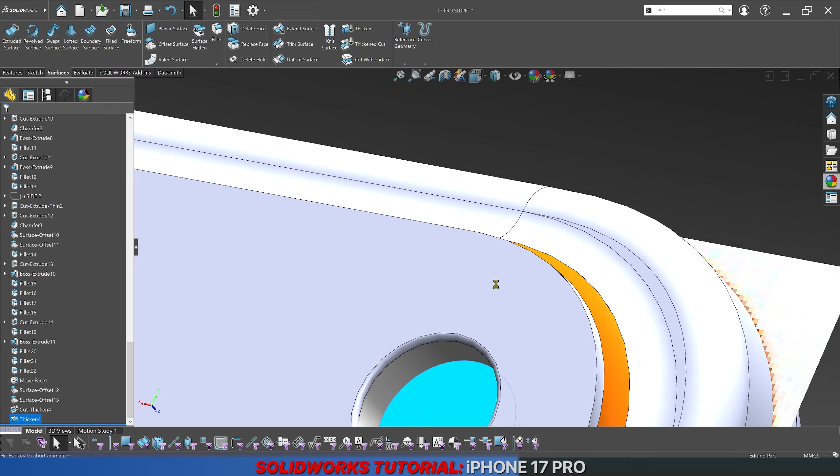In 3D rendering, as you can see, it's all kind of white inside, and the body is having its own metallic orange color. This color, if it was inside of the flash, would affect how the flash looks. Now here we have something like, I guess, a small light. So let's draw a circle of 2. Let me just see something on this sketch. Just a second. Yeah, this image you can't see that much. But anyways, let's try something like 2.25.

So parallel with creating this model, I'm gonna be looking at my own iPhone here in my hands. So sorry if I'm working a little bit slow. I just gotta make sure that this looks good. It's hard to see even when you hold it in your hands. But it should look something like this. It's gonna be like a millimeter or two. That's too much. One, do not merge result, of course.

Let's see how much we have here. Between these two, normal distance is 1. And this one is 2.25. Okay. Let's do a dome. So if it's 2.25 by 2, then it's 1, okay. Elliptical, no, click like this, and because it's gonna protrude out, this has to be quite lower, like 0.25, so it's not really protruding anymore.

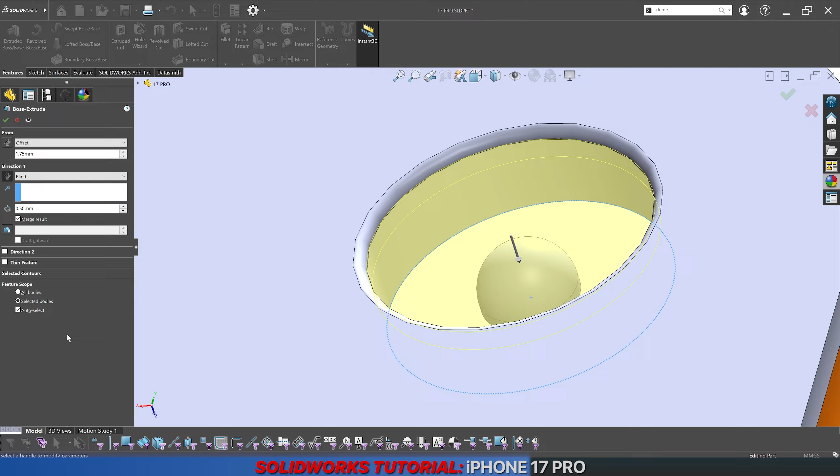Let's take this face, make a sketch, convert, exit the sketch. We're gonna go offset by, let's see how much. Let's do 1.75. It's gonna be something like, let's do 0.5 and make sure it's a thin feature, and we need something like 0.3. Do not merge results. Click OK. This is already gonna be the cover glass for this flash.

All we gotta make sure again is to use the same sketch and make an extruded cut. Go this way, through all, thin feature, 0.01 or 0.02, it doesn't really matter. Mid plane and select this. We are here making just a small separation, just so we don't have that visual glitch in the rendering. We need another sketch here with this edge.

.5. You must be wondering why am I doing this separated. You will see later. It's kinda easier for me because this flash is gonna have some, how you call it, let's show this sketch, some weird small cuts, and these cuts are easier to draw on a separate body when it's separate like this.

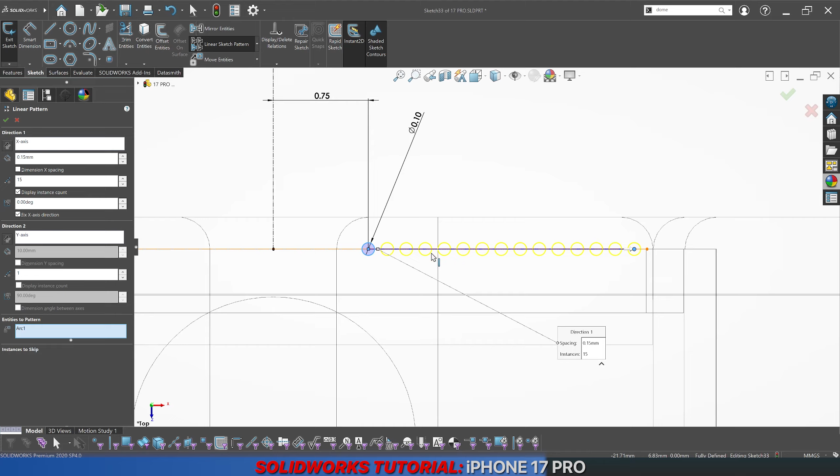Entities is gonna be a circle, 0.25, 3, 4, 5, 6, 7. Let's bring them more together, 0.15 or 0.1. No, that's 0.15. And we will go 10, something like 15 times. Click OK. Revolved cut.

So I guess this is to some degree an accurate representation of the flash. I feel like I still made a mistake. Let's delete first. No, just wanna trim it out like that. First one, second one, and third one. So we are left with 1, 2, 3, 4, 5, 6, 7, 8, 9, 10, 11, 12 of these. They are all 0.1, and first of these starts at somewhere around 1.2.

That looks way better. We can now combine these two glass bodies and right click, appearance, I'm gonna add something like a gray color and go to advanced illumination, transparency, something like that.

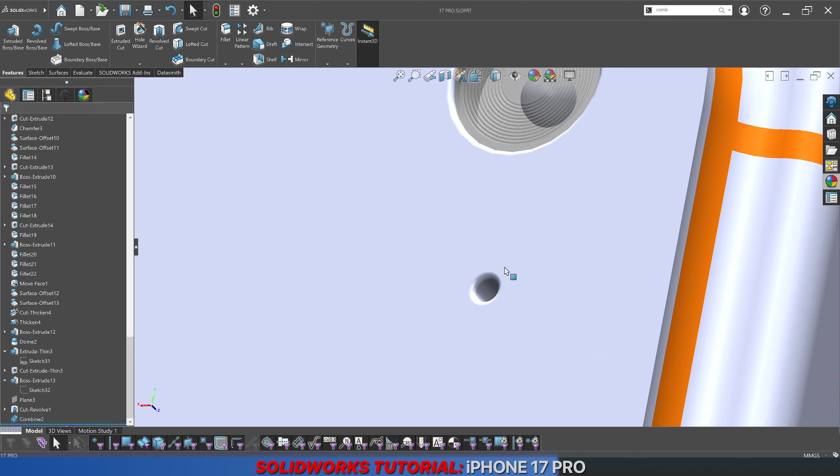The flash is done, and the mic hole, we can again offset this small surface by 0.5 or even more by 1. And we will apply another very dark color, copy appearance. Here you can place, if you want, the mic texture, but it's not really important. What is important for me is that in the rendering I can make it fully black and have like a dark hole here and not really see the orange body of the phone, similar to something that you can see here.

To finish off this phone, we have to do the rear cameras and the bottom tray with the charging port. So let's start with the cameras. Make sure that back is shown, and let me just check something on the right side of the device, because here in my notes it says that camera bump should be like 4 millimeters. So right plane sketch, and let me just draw a line. You don't have to do this, just now, and we go from here 4. Let's see if this makes sense. Yeah, something like that, I guess.

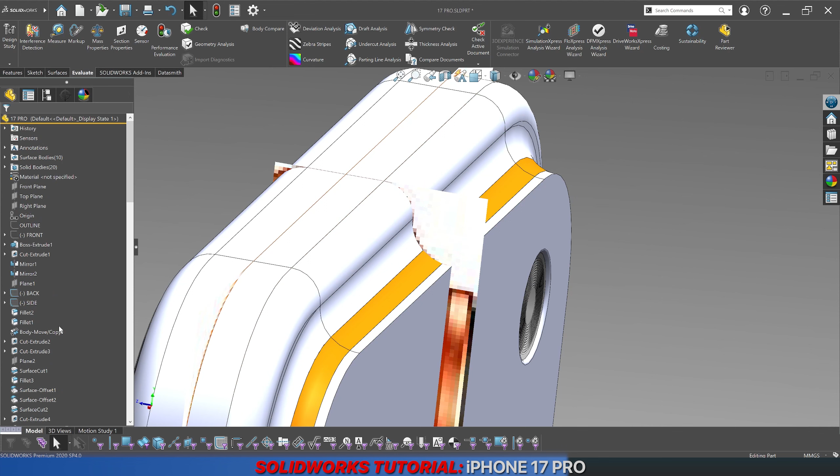Okay, that's that. Let's see now. Looks kind of weird. I'm feeling like this should have been a touch smaller. It's 2.7, maybe it should have been 2.5 or something like that. Let me just check here as well. Distance is 0.6 millimeters. Okay, we might have to change a couple of things. Now let's hide this, draw a sketch here, and I'm gonna also hide this one that we just made. It's not really important.

Let's see, so circle here. If I'm not wrong, it should be from this point, it should have some distance, like 0.7. And same thing here. Or 0.75. Let's see, 15. Yeah, it looks like 15. Let's see if I draw a center line that is sitting on a midpoint here, like this, and we do a mirror of this circle around here. Yeah, that should be that.

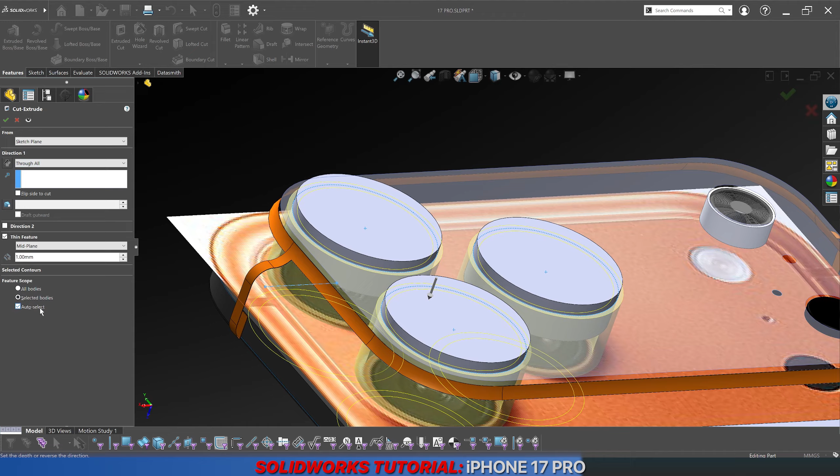And now one important thing, I'm gonna hide this main body. I'm gonna use this sketch, extruded cut, thin feature by 0.5, mid plane, or even 1, something like that. Through all, and select these 3 bodies. I'm feeling like here, as you can see, this shadow is showing me, like, I'm not sure exactly, but it feels like there is like a fillet on both sides of this, on top surface and on the bottom surface of this camera ring.

Let's unhide the body. And I guess that's all. With this 1.3 we have 4 millimeters. Okay, let's see how we're going to continue this. Yeah, we definitely need some cuts. Give me a second.

So I'm gonna click on these 3 faces, click convert, select for construction, offset by 1 to the inside, and let's see if this is the correct dimension. Yeah, it feels like it's 1 millimeter. Exit, and actually I'm gonna change the cut extrude because it's 1 here. Let's do 0.5 because this cut is going to be 1, so I have to have some margin there. I'm gonna go through all 1, 2, 3.

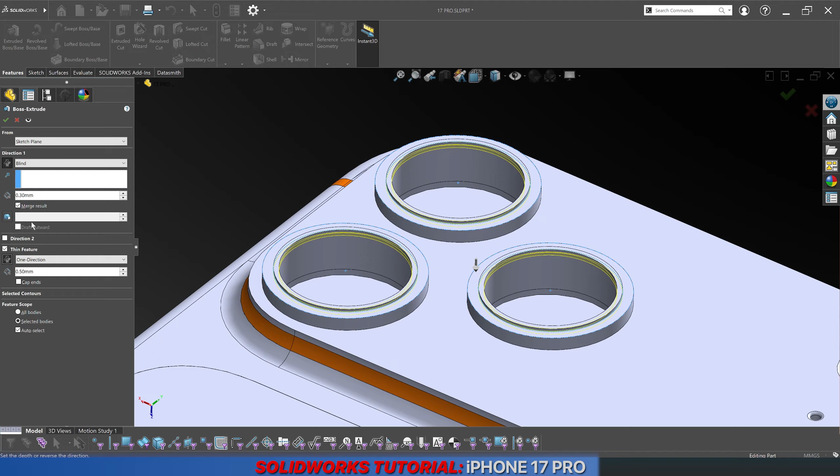Extruded boss. We're going face down. Thin feature 0.5 to the inside. It's gonna be 5. This time do merge result, feature scope. We will select this, this, and this body. Let's find our black color. Copy appearance, paste to body, paste to body, and paste once again. Let me double check if this is correct sizing or not. Yeah, I think that's pretty good.

Now for the camera housing, let's make a sketch here actually. Sketch, I will take the inside edge here of these black rings. Convert, let me double check here. Yeah, maybe it's not only 0.5, it's close. Let's leave it as it is just for a moment. Housing is gonna go something like, I don't wanna go fully to the top, maybe 4 millimeters. Do not merge results. Judging from this image, yeah, the lenses are just a touch more to the inside.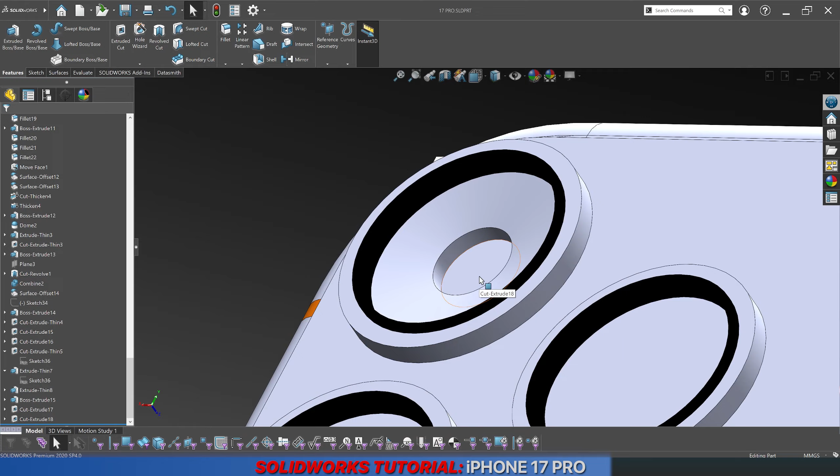And then on this face, just a quick sketch, convert, exit, and extruded cut. Let's do something like 1. There's the camera housing done, and we can make the lens. I'm just gonna do something like this. Click on this face, go to dome, add 1 millimeter. Let's see, elliptical or not. Okay. Or 0.75, 0.8. It's gonna be something like that. Also, I'm gonna shorten this to 0.7.

And this time around, go to surfaces, offset surface by 0. This way we are separating this, hide, and I'm gonna take again this sketch and make a cut. Let's just repeat it. It was, I think, 0.7, direction 2 through all, and this way we are removing this dome from the housing. So the housing is this, and now you have a separate surface here for a camera lens.

Now, sometimes you will have a couple of lenses inside the camera. We can actually do a pattern. So linear pattern, filter surface bodies on F5, and go to bodies, click on it. Let's do like 4, direction 1, 0.1, yeah, I guess that's all. So you're gonna see that now we have 4 of these. Let's just quickly make a plane. Right plane is gonna be somewhere around here, just so we see what we are doing actually.

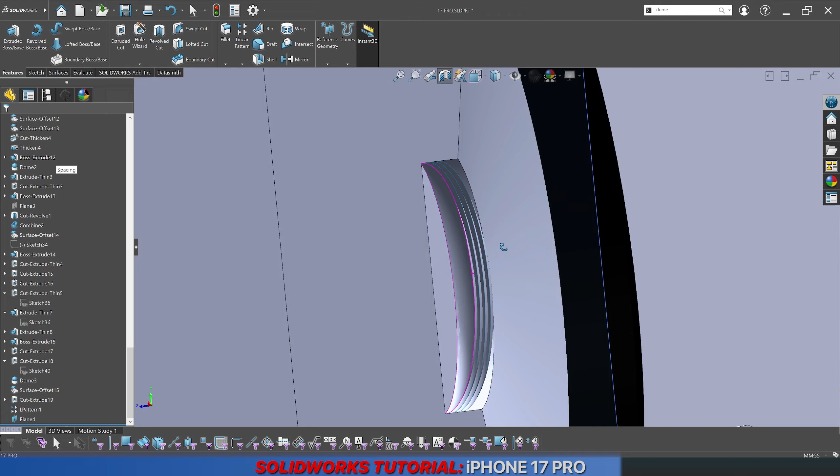Click on the plane section. So there you have it. You have like 4 of these that can, in the 3D rendering, represent camera lenses. Undo the section, hide the plane, and the process is gonna be the same for the rest of the two lenses. Let's also not forget the glass, or maybe we can do it at the end.

I'm also gonna add a chamfer around here, maybe 0.2 at 45 degrees. I'm gonna go to right click, appearance of this body, and make it dark but not fully black. Click OK.

And like I said, similar process for the rest of the two camera housings. Sketch here, convert, exit, cut. Let me see. Here it's gonna be probably different. So 0.5, it was something like an 80 degree angle. 82, 83, no, something like 80. Let me check here. This looks like it's fine. So it was 0.5 cut at 80 degrees.

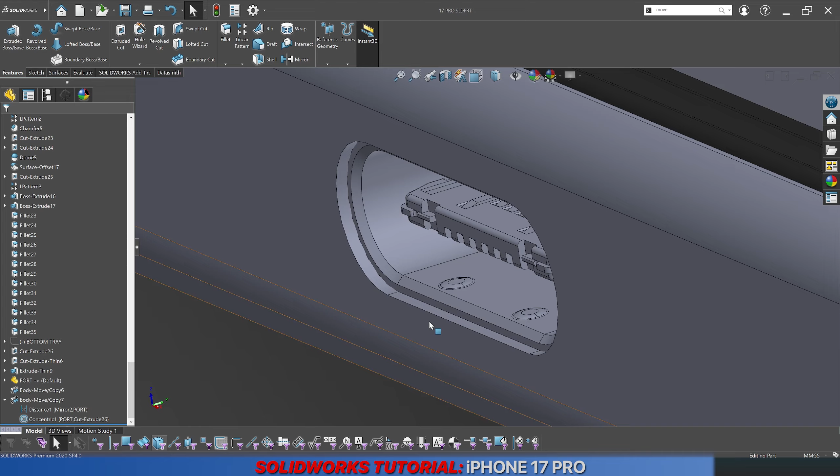Now of course, as you can see, it's protruding outside instead of going inside, so let's change this distance. Go to edit feature, distance, flip dimension, click OK. Now I'm not exactly sure if there should be a fillet or something, but I'm gonna add chamfer here, 0.25 for this edge. You can add fillets if you prefer fillet. And visually from these images, I also think it's actually chamfer, yeah. It's definitely chamfer, I can see it from reflection rather than a fillet.

Also we have the screws, which I'm gonna leave for the end. Sketch here. We have 1, 2, 3, 4, 5. It seems like these are symmetrical. Center line, something like that. For a moment I'm having a feeling that this is not fully in the middle. Bottom tray, let's see our blueprint. Yeah, it definitely is in the middle. So hole number 1, dimension is 1.25. That looks small actually. 12 and a half. This is a perspective image, like I said, so I'm not trusting it fully.

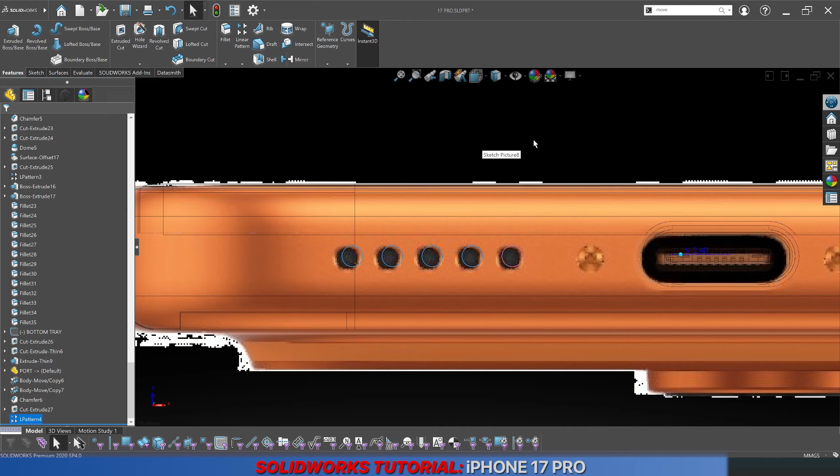So now we can see the model first and then the image like this. 1, 2, yeah, definitely this pattern should be something like 2.5, 2.4. It's gonna be 2.4, 2.45. Yeah, 2.45. And we will take cut and pattern selected, mirror on the right plane. Let's also add chamfer. It was 0.25 here, maybe for this one 0.1 should be more than enough. One, two, three, four, five. Luckily there are not plenty of them.

My PC seems to be struggling, even though this is not really some... What? Come on, it cannot make a chamfer because of what? Of course, the problem is these edges. I mean, come on, how stupid can this be? Let's reselect only this inside edge. Yeah. Now it should work. Yeah. I mean, come on, man. This is so... Okay, let's get over it.

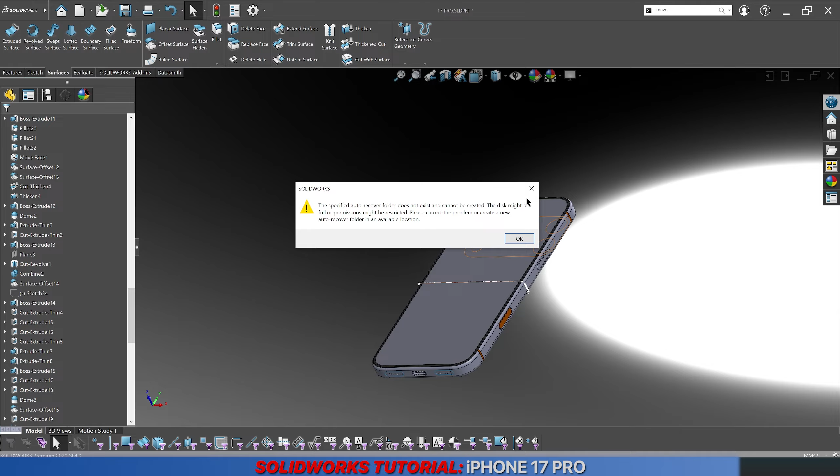Now this is gonna be a planar surface. Again, let me just find some black color. Copy appearance, this will be used to represent the inside mesh of these speakers. Paste appearance, and we can use move again. Make sure you filter surface bodies, this one and this one. Translate rotate, we can be like 3 millimeters inside, and that's it. That's that, and the last thing here, the screws.

One thing that I don't appreciate about these iPhones is modeling these screws. I don't think I've ever seen any other smartphone having two screws at the bottom, and this trend is kept probably from the first iPhone ever. Should this be 1.75 or 1.5? I don't know. If the hole was 1.25, let me check here. Yeah, it does look kind of bigger. I don't know. Is it this big? No, it's definitely not. Let's do it 1.5.

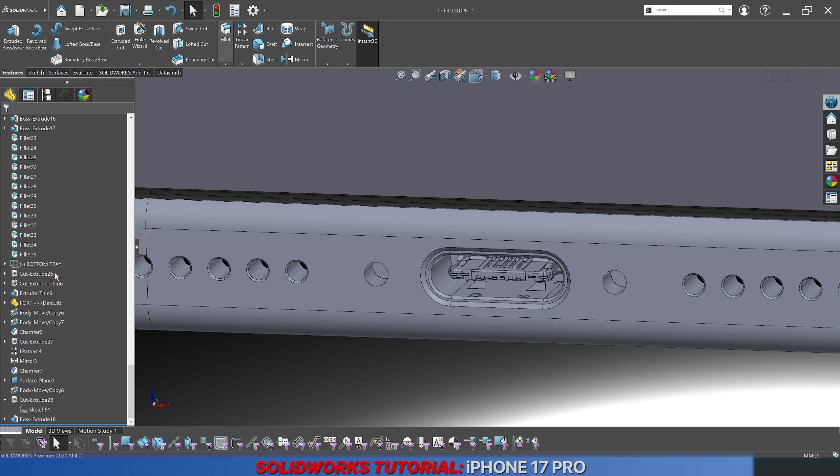Unhide this one. For the screw, how does the screw even look? It's like a star. The most annoying part of this, of course. I feel like there should be a circle here first, or maybe not. So perhaps a triangle from the midpoint up, make it vertical, make these two equal. What angle could it be? Perhaps 90. Let's also add some dimension here.

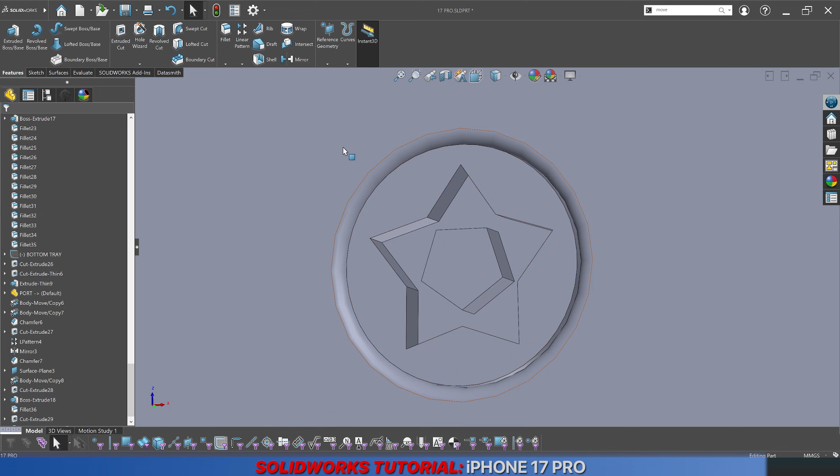Yeah, the angle was definitely too much. So how much could it be? Like 75.4. Maybe even more. 70, of course. That looks better. Let's add fillets here. 0.35. Let's click on this face, convert, exit. We will of course cut up to here.

I'm still not convinced about the look of this screw. It's kind of rounded around here. Roundings. Let's add fillets. 1, 2, 3, 4, 5, 0.1. Now this does make a lot more sense. I feel like the angle is also still off. Yeah, there are like flat places here. I don't even care.

What we're going to do right now is this. Take this, go to move, find move face. This is 0.2, so we will move 0.15. So, no, it was 0.25. Let's move 0.2. Okay, click on the face, make a sketch, convert. Also, this fillet can be a touch bigger. No, that's too much.

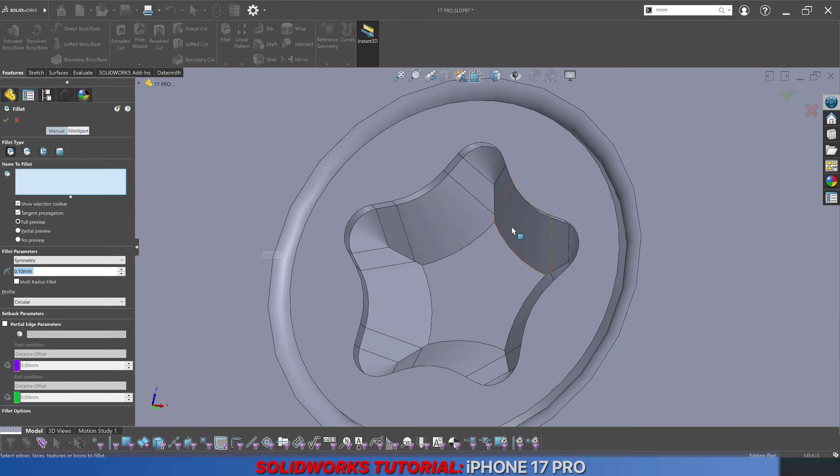Let's see if we can fillet these. There should be no fillet, I think. And here 0.1 is so big when the screw is so small. 0.05 it's gonna be in the end. This looks awful to me. I don't know why, it just looks terrible. Like what have we even done here? Let's shrink this down from 0.1 to something like this. I just don't want this to go too much in the eyes of the people.

Should I fillet this as well? Sure, why not? Probably the worst modeling of a Torx screw in the history of YouTube. Mirror, bodies to mirror. I'm pretty sure it shouldn't be like that, but who cares? Let's find a right plane. Bodies to mirror is the screw. Click OK, and that's this portion done. I feel like I'm gonna leave the emblem for the last video, and we can just double check later if everything is fine. I'm gonna also hide this sketch, and that's it for this one.

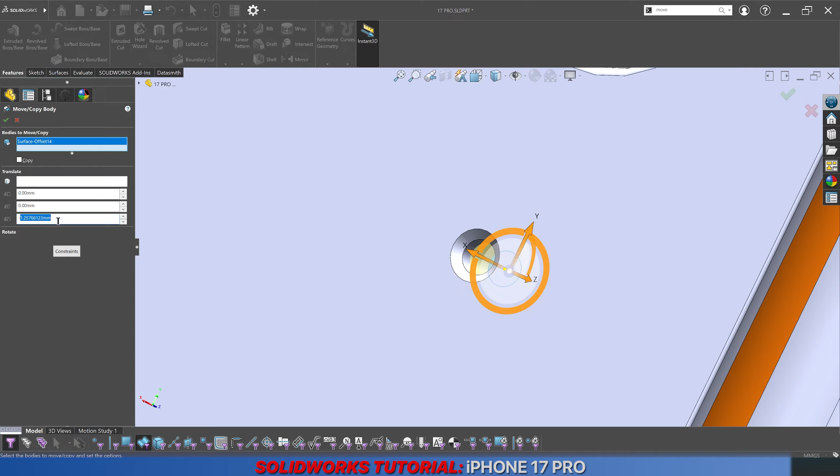I'm gonna use move surface body and just slightly move this outwards. When I say slightly, 1 millimeter is enough. Yeah, that's cool. And let's do the same for the speaker, for the speaker surfaces.

Here we can do even 1.5 or maybe even more, maybe 2. So -2. That's good. I think we fixed pretty much everything we had to fix. Let me double check everything, but I think we are good to go.

The glass is there. Let's see if we also have to delete some things. Screen glass is there. We don't need this surface, I think. Let's delete that one. Doesn't do anything. And when it comes to solid bodies, we have a copy of one. You're also not gonna need this one, and that's all. So we are just cleaning the model now. Let's delete this one. Of course, if you ever need that body and you wanna fix something, you can delete the feature or go like this.

Anyways, let's get back to the emblem. Double check everything, but everything is fine. Also, let's double check here if there is a gap. Yeah, this is a 0.05 cut extrude thin, because this is gonna be glass surface. So sketch on this face.

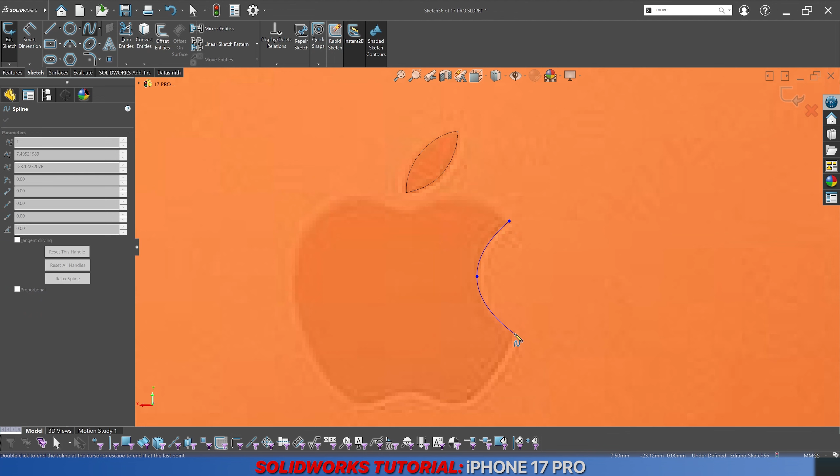Okay, we can proceed to the bigger portion. 1, 2, 3. Let's just make it a little bit more subtle. Okay. Maybe we could actually fix this point and this one. They are standing well. I don't want to lose their position. So 1, 2, 3, 4, 5, 6, 7, 8. I hope these 9 points are gonna be enough to execute this logo.

So let's go from the first one. It's kinda hard to see right now. Just make sure that the logo is smooth. I feel like the biggest issue is something like in this point, because as you can see this one is going way too far. Maybe move this point to the inside. Yeah, the biggest issue is also this point here.

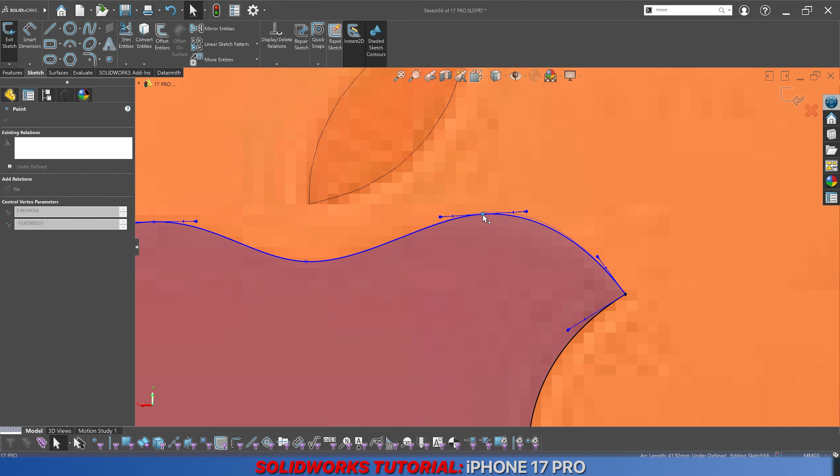I'm just gonna go and if I fix everything, yeah, nothing can move right now, so I think the shape is fine. Maybe I did too much. I can see it now. Unfix. We cannot delete relation. Let's delete relation only here. Fixed, delete. I'm gonna lower this one like that, and I'm gonna lower something like that. It's too sharp right now. That should do it.

Extrude cut, one here. Okay, same thing like we did for the small piece. Boss extrude, do not merge results. And we will do another thin cut through all, thin feature 0.02 mid plane, and select this one and this one through all. Okay.

I'm going to add some super small fillets. I don't think there are fillets on the real product, but for rendering purposes these fillets will do the job. I am only selecting edges right now. Let's see how much we're gonna do here. 0.1 maybe, 0.1 is not too much. I'm also going to copy appearance from here to here as a body. And that's all.